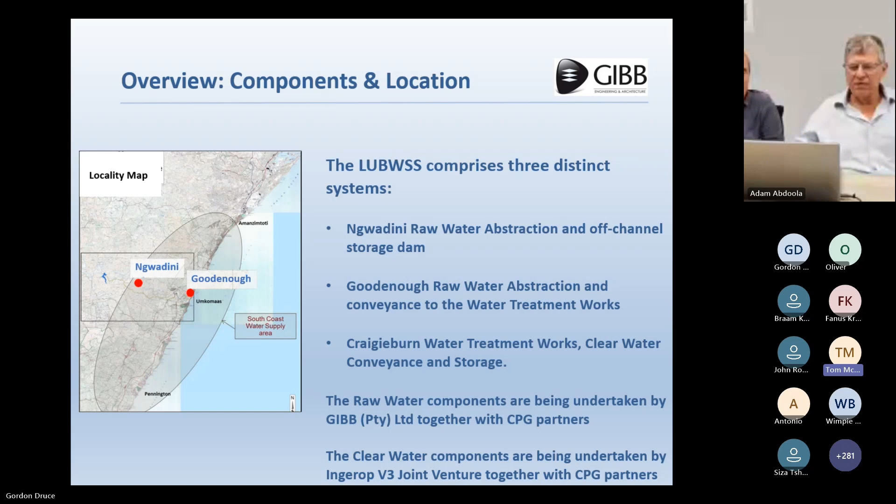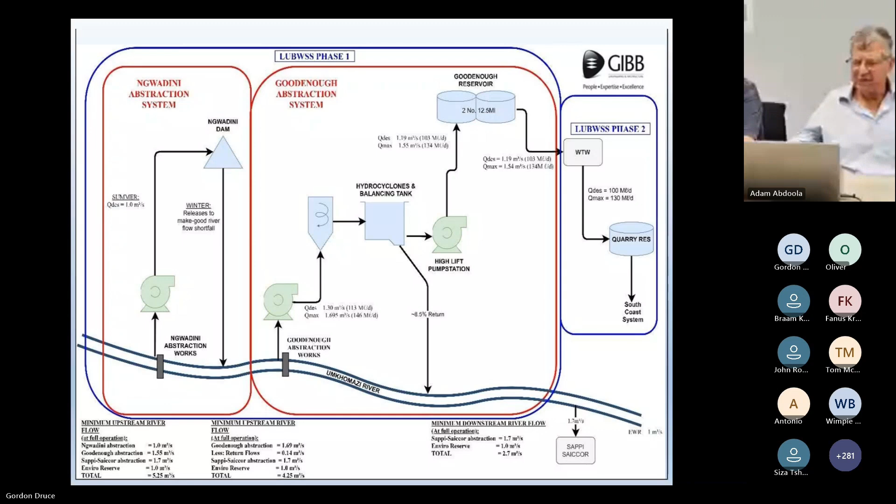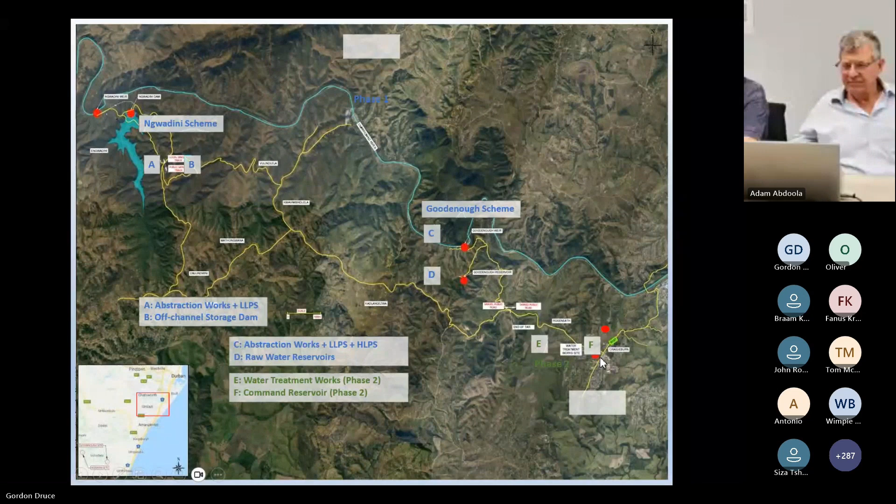So those are the components. So again, for the sake of an overview, we're showing you the number of contracts. There are 5 contracts. There's the two that are finished, the advanced works, the water treatment works. Sorry, not 5. That's 5 from our side, the raw water side that GIBB is responsible for. This shows the whole lot.

So there's advanced works for the water treatment works, which we had nothing to do with, sorting out earthworks platforms. Then there's advanced works for the Ngwadini abstraction and dam. That was really just access roads and bush clearing. And then construction is currently underway. It's the Goodenough abstraction and pumping that we're talking about today. This has been underway for the last year and a half, the civil works 2 years. So underway for 2 years.

The civil works are pretty advanced, and shortly, at the end of the year, beginning of next year, all the mechanical electrical toys start coming in. The Ngwadini Dam started in January this year. So there's a lot of earthworks going on there, and that will be the subject of a future presentation, I'm sure. Because the Ngwadini Dam, what makes it a bit different is there's no clay in the area. So Ngwadini Dam is a rockfill dam with a concrete face to make it watertight.

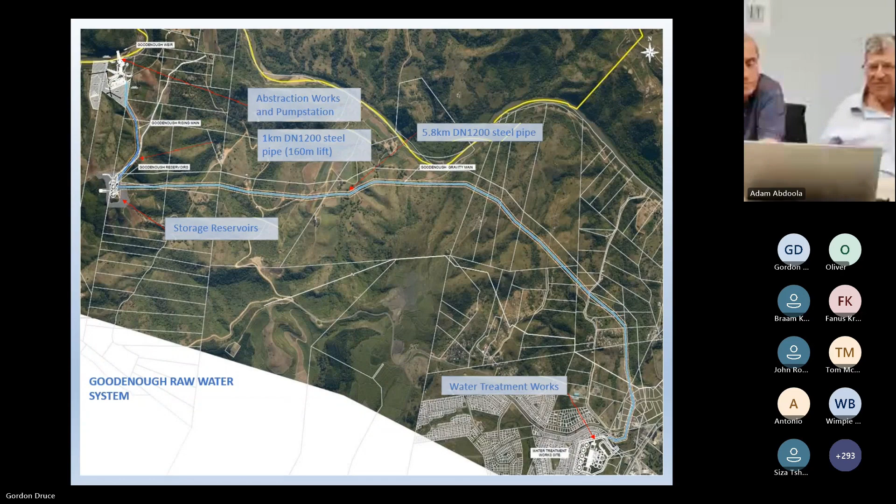So now narrowing down onto this particular contract that we're doing the site visit for today, the abstraction desilting design considerations. Looking at the abstraction out of the river, the Umkhomazi River is nothing like the Uthukela River, but it's still a major river. It's got quite a tight valley, so the valley sides are very steep. So when the flood comes down, the variation of water level is very high. It also has very high sediment loads in flood. Again, not as much as the Uthukela, but it's very significant.

And bearing in mind this is a primary bulk water supply, Umgeni has got to supply water 365 days a year. So if you've got a 4 or 5 day massive flood, you've still got to be able to keep on pumping. If it really gets exceptional floods and you're pumping mud, you need to stop and rely on your stored raw water and stored clear water at the quarry reservoir to keep the water supply going to the south coast. And then if necessary, under very heavy sediment conditions, you can throttle back. The waterworks can run at a lower rate, so at least you have some water, even though you're having to cope with huge volumes of sludge. So that's the sort of thinking needed to have a high level of assurance of supply.

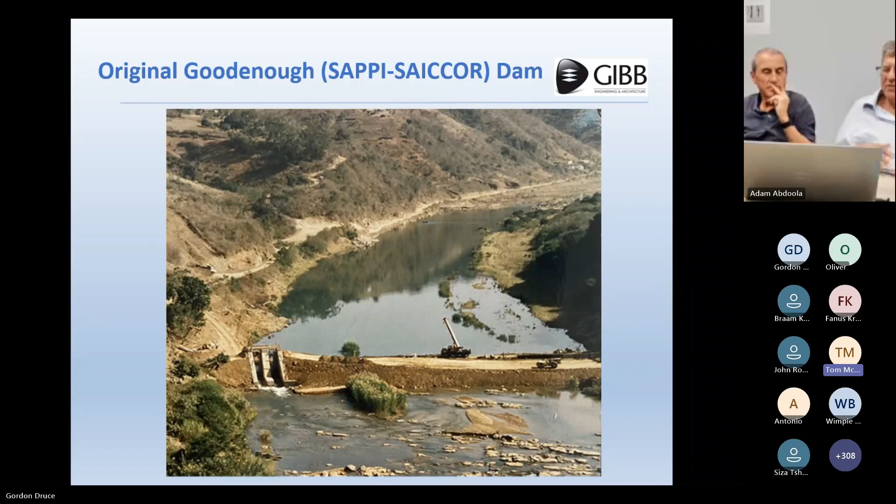So when we looked at the siting, this is a view of how it was when we started the project. You can see the original Sappi nominal weir. It's only 1.5 meters high, and the diversion structure on the left, which would release it. So that's totally useless to Sappi in that state, because it doesn't store anything significant. That was fine for us. But you can see on the north bank, it's very steep and inaccessible. There's no road anywhere near that. So you only have access on the south bank to do all your operations.

Again, unlike the lower Thukela, where you could get access from both sides, which did make life easier when doing your diversion works. So that's another point which made the constructability less easy. This photograph also illustrates the steep slope. You've got at least a 1 in 4, some places steeper, where you're now going to build all your toys, the pump station, outside the floodplain.

Going back to the siting of the weir, it's very important to make sure your abstraction works doesn't clog. What does happen in a major flood, as the flood recedes, it dumps its load. So over a matter of hours, as the flood is receding, you get a massive deposit of sediment in the river. And if you're not at a bend where you've got the higher velocities on the outside, you can have the situation where your abstraction works gets choked up with rapidly depositing sediment, and it's very difficult to flush it out.

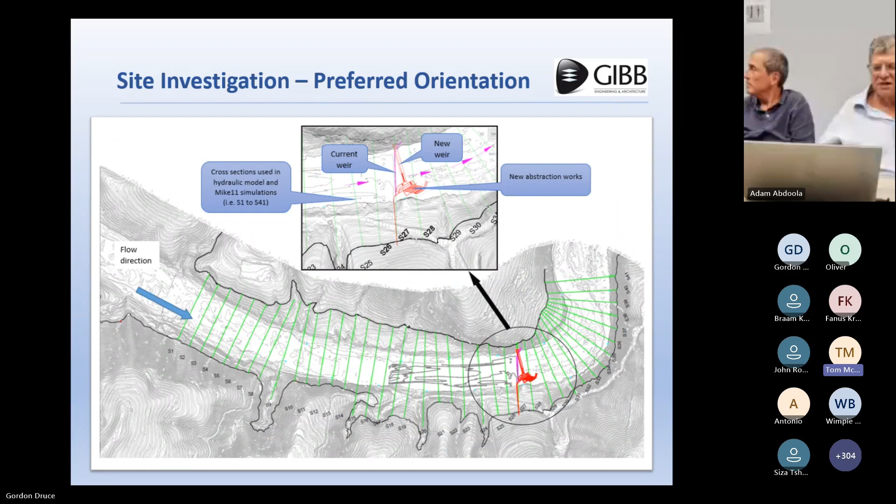Gordon, just use the mouse to show what Duncan's talking to. Gordon can. There we go. I can't actually see your mouse, is it? Yeah. Okay. Yeah, it'll be easy, I think.

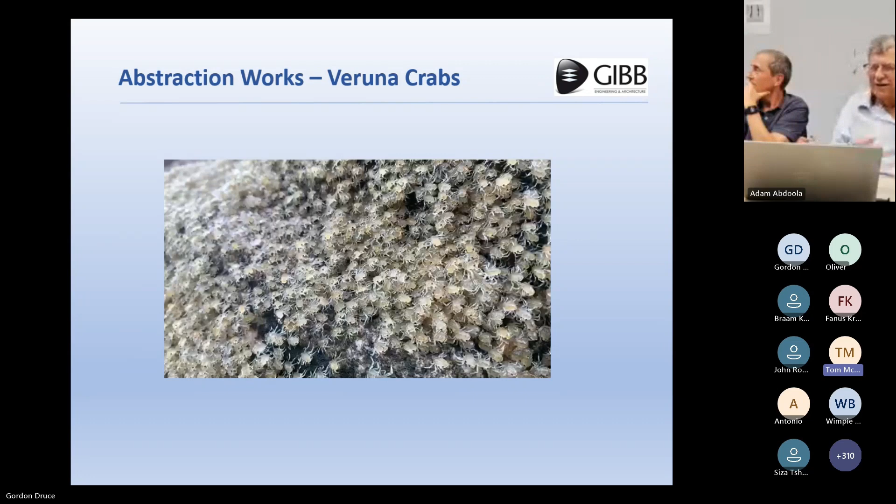These crabs also need to be accommodated. They can't really go up the fish ladder, but on the other side of the weir, we're creating what we call a creepy crawly ramp, where you have a shallow wetted surface, because they would crawl along the water's edge in shallow water on the rocks. So if they can't get up the fish ladder, they carry on and they end up the other side of the weir, and they'd have a shallow water's edge that they can climb up. Well, that's the idea anyway. Hopefully it'll work, but we'll see.

So yeah, the creepy crawly would be on this side, on the near side of the weir. That's not a good representation of it. Effectively, it's just a natural rock surface, so it won't actually look quite like that. We have actually modified it since this model was done. This model, by the way, is done in Revit software, which is excellent for the structural guys, but it does need people who are good at Revit.

The idea of Revit being a 3D model is you've got the accurate representation of the whole structure, and you can generate a long section anywhere in it. Whereas the old timers like myself and Gordon are used to doing everything in 2D drawings, where you need lots and lots of cross sections. So you can now generate a cross section wherever the contractor wants it. If he wants an extra cross section, it's theoretically a click of a button and we can generate it for him.

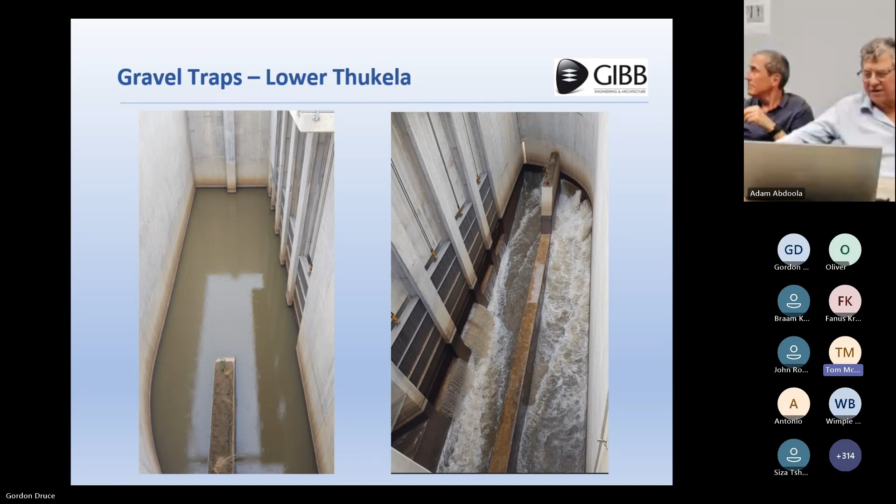Now going on to the hydraulic modeling. So this was done at Stellenbosch University back in 2017, 1/40 scale. The whole river gets surveyed and modeled on a 1/40 scale, and the abstraction structure gets built out of wood, plywood, painted, with the weir, and then they try it out with the different return periods and putting sediment down. They use a mixture of sand, and for the bigger particles they use peach pips, which doesn't strike me as quite intuitively correct, but they say it behaves hydraulically very well to model the bigger boulders and the like.

So the model helps prove the flushing. They put a whole lot of sediment in there and open the radial gates, just a slot which represents a radial gate, and they see that it actually flushes out quickly and effectively, and if not, they change the orientation and try it again. The purpose of the modeling is that it's a very complex process to do it numerically. So this gives you an exact scale of what will really happen. If it works on this model, you've got a 99% chance that it'll work in practice, and you've got the orientation just right to make sure you've optimized the situation.

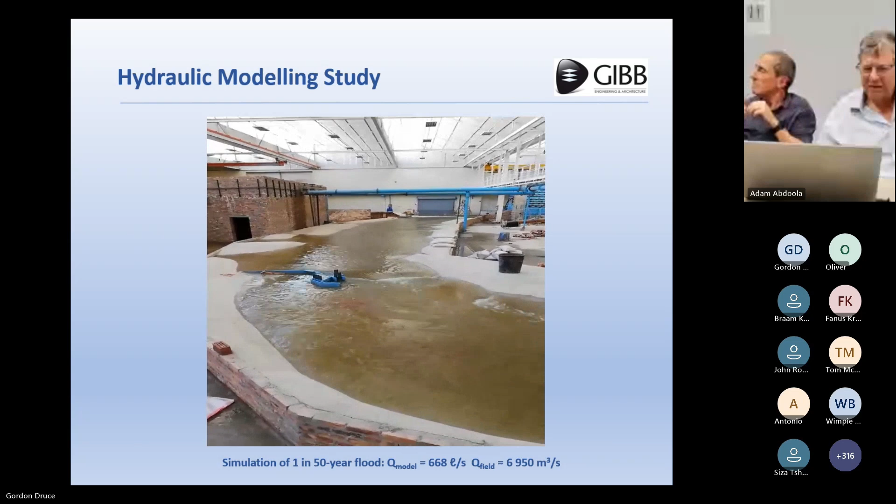So we also used the model. While we had the model, we realized this problem with the cofferdam. In order to give the tenderers a good basis to know what to do with their cofferdam, we modeled various things like how much of the river we can block off with a concrete weir, and how much of a gap to leave and what effect that would have.

So after playing around with these models, we could then say to the tenderers that if you build a 10-meter high cofferdam and you leave a gap of so much, like we specify the distance from the outside face of the cofferdam to the structure itself, you must build it within 50 meters, leaving a certain minimum gap. Then that constitutes a 1 in 5 year flood.

And then in terms of risk events, if it overtops the cofferdam, the insurance will then pay for that, and that'll be a claim event. So it takes the guesswork out of tenderers, so they know exactly what they're pricing for, what sort of structure, what height, and what the dimensions are that they must leave free. And so that was like a fixed design specification. So we know how to deal with the floods, and insurers were also on board with that.

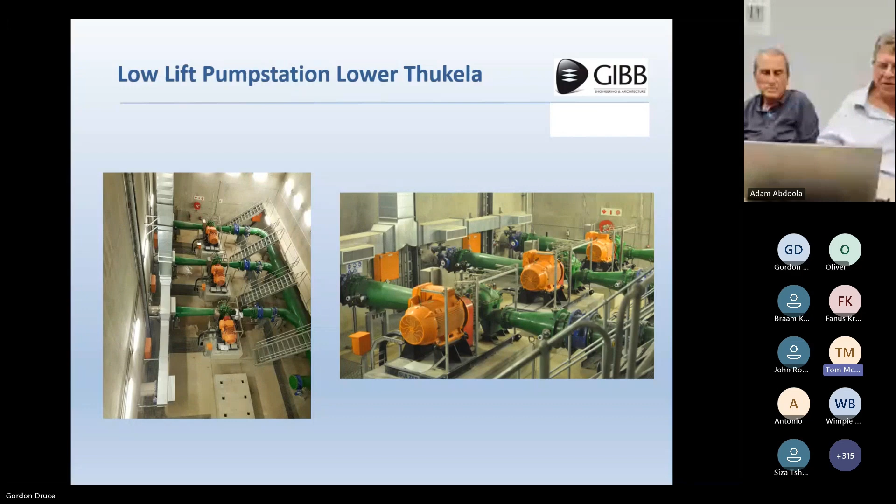There's nothing in it. It's all solid, and that gives you a working platform to get access for what was initially intended to construct from that, but also to maintain and bring the pumps in and out of the low lift pump station, and gives you access to the abstraction works up to 1 in 100 year flood. So that's the lower part.

The road that bisects the site is actually a public road, a district road. It's a dead-end road. There are only 2 residents living beyond. So on the right-hand side is where you approach from Craigieburn side. When you're coming to site, you'd come down from the right. The road going to the left is only 2 residents who are a bit bemused by all this, because it was such a peaceful valley until the contractor started making a noise and rearranging the landscape.

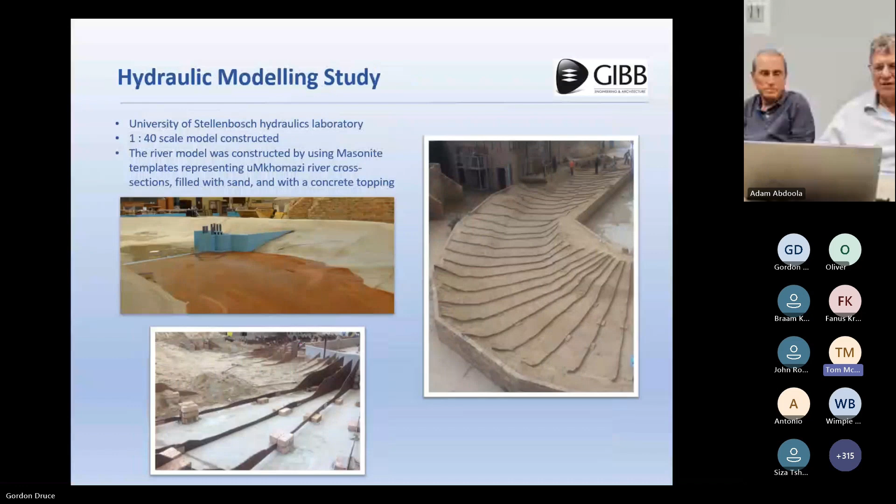And is that built already when we look at the progress? No, not yet. The contractor's been concentrating on the abstraction works itself first, and then he's still got to get to the other side. That will happen in 2 years' time.

So getting back to it, we ended up pumping up through the hydrocyclones. That would need to go into balancing tanks. So you'll see 2 compartments there. The idea being that, with the hydrocyclone, we'll show you just now how that works, the part that gets pumped away goes into the balancing tank, but because it's still containing sub 25 micron particles, there will be some sediment.

So in order to flush it without taking the system offline, we have 2 tanks. So you take the 1 tank out of commission, drain it, and then use the other tank, pass through flushing water, and you flush out the sediment when you need to on the one side of the balancing tank, while maintaining the flow to the high lift pump station and on to Craigieburn. That's why it's got 2 compartments, and it's designed for flushing.

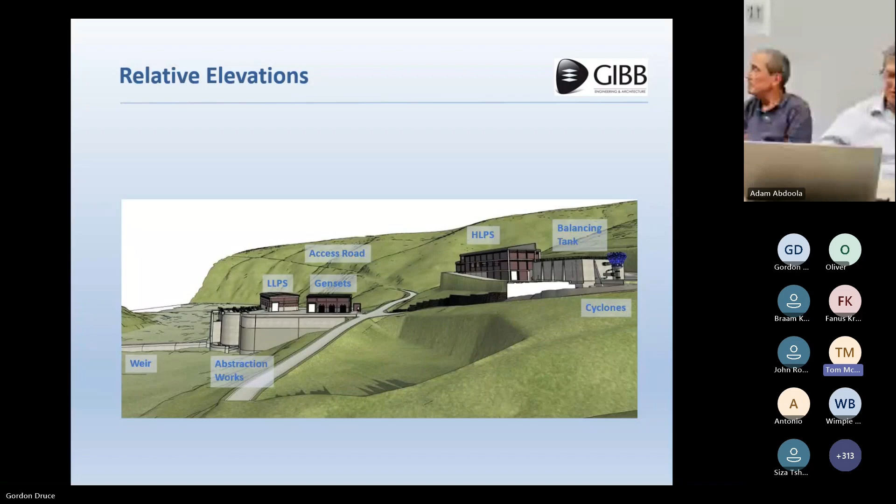Just another modeled view of the elevation. You'll see from the photographs it actually looks more dramatic than that. This looks relatively tame, but the photographs will do it justice, I think, and how steep it is. We've got this massive retaining wall on the front, which we'll talk about with the photographs.

Getting back to the hydrocyclone, as I say, we want to take out as much as we can physically from the abstraction system. In reviewing, although the feasibility and preliminary design was done by AECOM, we did have another relook just to make sure that we haven't missed something. So we did consider what the options are, because this is an important step, and because it's got to be pumped some distance, it's important to do the best you can. The hydrocyclone is very compact, as you would have seen from the previous picture.

The one alternative we thought of, given the steep site, would be you get GRP pipes, like 1.8 meter diameter, and you have a lot of them, 20 of them all in a line. You've got the steep hill, 1 in 4 slope. One possibility was to have like a pipe organ where the water's flowing up, creating very laminar conditions, flowing up these pipes, and you then flush them one by one, alternating while pumping continuously. And at the top, you then have another transfer pump station to send it up to the reservoir.

The one advantage of that would be you do away with the hydrocyclones. That had some issues at the Lower Thukela one. So we were just wondering what other alternatives there were, but it was decided this is too new to try on a major bulk water scheme. So the client wasn't keen to do something new. They said if it was a small waterworks, they would have gone for it, but being a major bulk primary supply, they were keen on sticking with tried and tested.

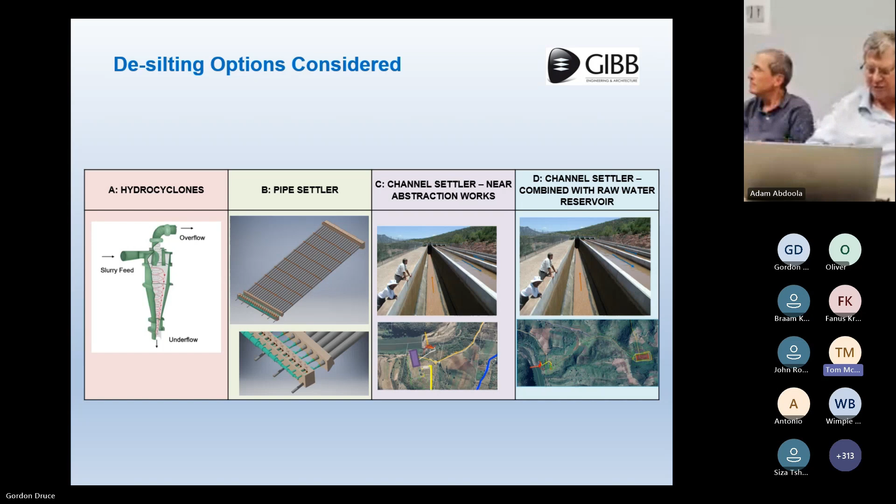The usual one that's done is long settling channels, but these are very expensive and take up a lot of room. They'll be about 150 meters long and designed to create laminar conditions flowing down a channel, and then you take out one channel at a time and flush out the sediment back to the river. So that's just by way of illustrating why we said it. Really, there's no other choice but hydrocyclones to take out as much as you can.

And although you're only taking out a small percentage, maybe at most 5% of the sediment, it's still worth it, because that's 5% less which gets taken out of your balancing tank and your raw water tank, because you're talking about hundreds of tons a day of sediment altogether, which goes to the waterworks. But if you can save 10 tons of that a day, not settling out in your balancing tank and your reservoir, you save a lot of maintenance work.

So the idea is to use the hydrocyclones to take out as much as possible. Now, the nature of hydrocyclones is they're designed for the mining industry to separate crushed ore slurry from the water. So you want to separate out your crushed rock with your gold or whatever in it you're trying to extract. And that's normally done as quite a thick slurry. Here we're only talking about up to 1% suspended solids. So it's much less solids than would normally be used in a mining application,

but the physical process is the same. The water comes in tangentially at the top, and so it comes in at a very high velocity and spins. You have what's called a vortex finder in the top middle, and at the bottom you've got your underflow spigot. So the size of the vortex finder, the size of the spigot, the geometry of the hydrocyclone determines how efficient it is in spinning. The heavier stuff gets thrown to the side and ends up at the bottom.

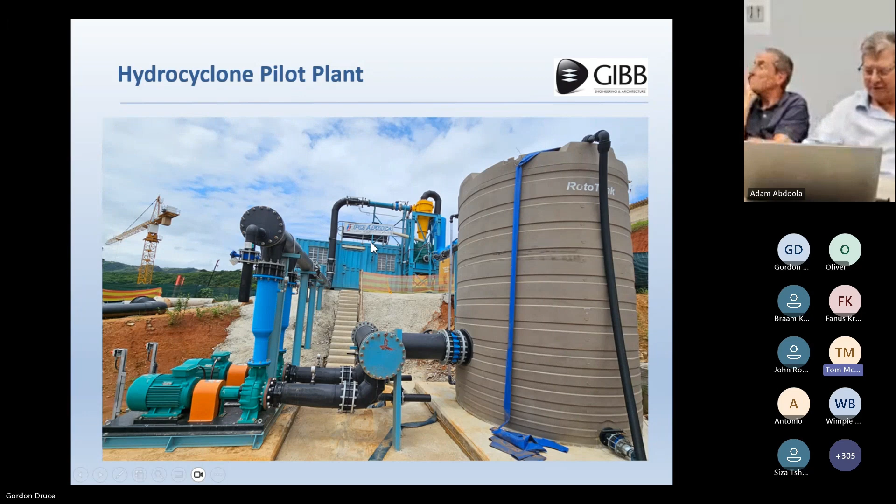So the contractor's still battling with the dynamics of putting through the sediment and getting meaningful readings that actually make sense. There are a couple of learning curves to go through, and we're still going through that, with how to make sure we get a representative sample coming through, because it doesn't settle out in the main tank. This is just a further detail. So the blue, the hydrocyclones, the lower pipe would be when you bypass it. So when we deem the water not worth putting through the hydrocyclones, you'd open a valve and send it straight into the balancing tank.

This is a model of the high lift pump station. It's got 5 main pumps, just over 1 megawatt each, 6.6 thousand volt motors to make them more compact. So on the left is the pump hall. These major orange boxes would be the variable speed drives. These are very pricey animals, about 5 million rand a pop, and very large and very heavy. So the electrical hall is quite a major part.

The reason why we need variable speed drives is because the power coming from Craigieburn, Eskom's power, is on a spur line, so you don't have the benefit of a ring feed, where if one side goes down, you can go on another. So it's a dedicated 22 kV power line, about 7 kilometers away, and they aren't able to handle the massive starting loads that you'd get with conventional soft starters or other means. So Eskom insisted that we go variable speed drive to keep the startup loads very low, and it also means you can fine tune your flows through your hydrocyclones to get the exact flows that you want.

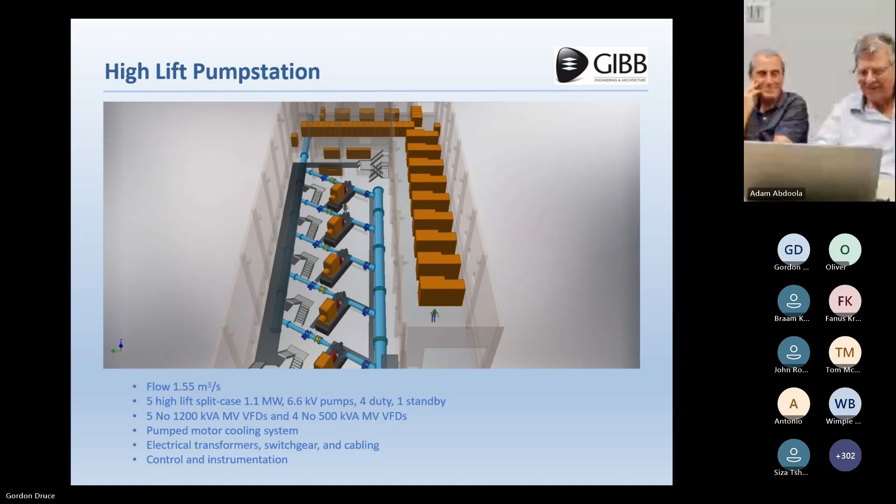So low lift's got 4 pumps, the high lift's got 5 pumps, so they're obviously slightly smaller individual capacity. Standby generators, we covered that. Pipelines, general works: there's a 1 meter diameter pipe from the low lift going to the hydrocyclones, to keep the velocities up, to go through the hydrocyclones and not have too much settle out in the pipes. And we've got 1,200 pipes going up to the reservoir and 1,200 pipes going to the waterworks.

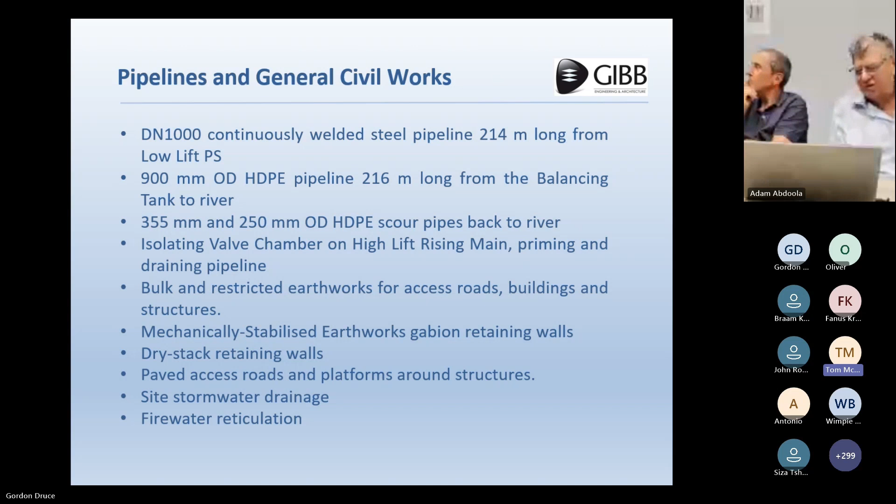There's another question from Umkhomazi. Was it the designer's choice to choose VFDs instead of capacitor banks? I don't even know what that means, but hopefully you do. Capacitor banks are more for correcting power factor, so that you don't have too much inductive load, which pushes up your electricity bill without the benefit of extra power. So capacitors would be used to bring the lagging or leading power factor back to 1. But variable speed drives do that as well. So that's a side benefit of the variable speed drives.

Capacitors also are like Chinese electric cars; they're liable to explode. They can be dramatic and then need to be replaced quite often.

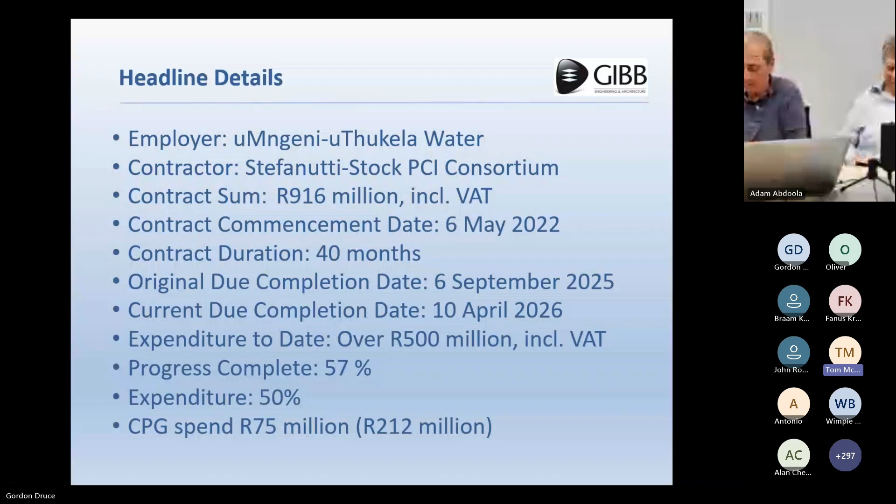The contractor is obliged to use contract participation goal partners, and their target is 35%, so it's like 212 million, and to date we are up to 75 million. Headline quantities: bulk earthworks which are payable is about 40,000 cubes for the abstraction works site. There was an advanced works contract which didn't go ahead, so it was added to this contract as a VO, and that was for the bulk earthworks for the raw water reservoir site, and there the contractor removed 54,000 cubes. We didn't have to take it too far away because we put it in the valley next door to create a platform for the contractor for that project.

Mechanically stabilized gabion walls, we put about 1,300 cubic meters in. Concrete, both for the permanent works and for the contractor's temporary works. Structural and mass concrete are about 10,000 each. So we've got about 21,000 there, and at 5 cubes a truck, it's 4,200 loads. So I guess the truck drivers are getting used to the road and they can drive up and down there in their sleep. So far, 1,400 tons of reinforcing have gone in. Okay, those other figures I've mentioned already.

You've seen that picture because Duncan has shown it already. He stole it out of my presentation.

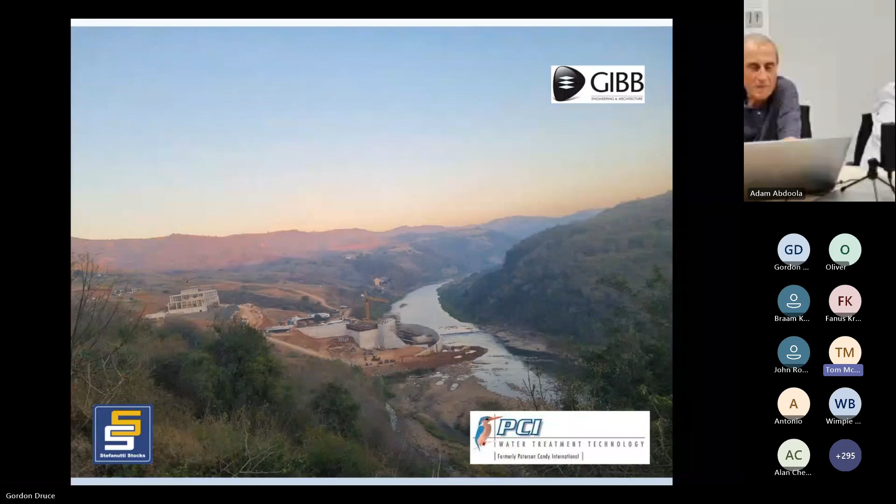Esmond took that picture about 2 months ago, so if you get the lighting correct, you can get quite a good view of the early morning valley in wintertime. And that one as well. It's a view from the high lift pump station platform down onto the abstraction works. Colourful sky in the background. The river can get quite angry with you too. That was early 2023.

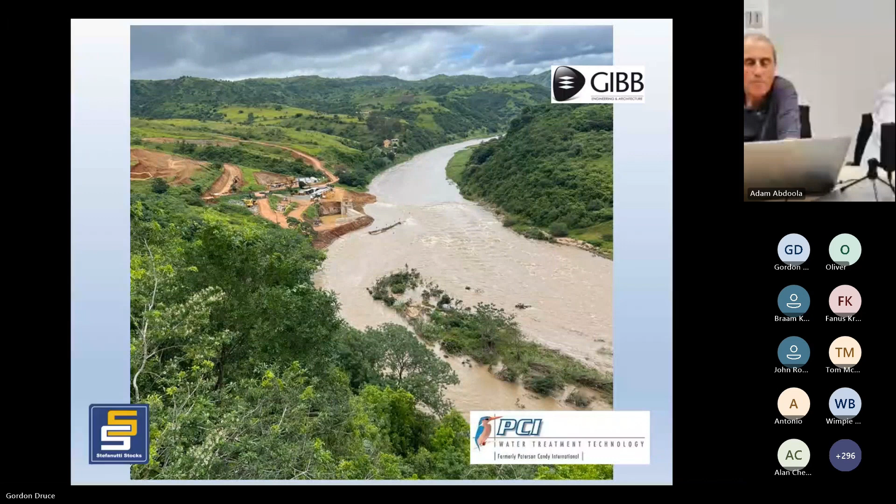Okay, let's see how these drone images work now. So that is right at the beginning of the contract. You can see the diversion structure over there. The water is very clean. This is the middle of winter. This is the low weir wall, which is the upstream toe of the earth embankment that SAPPI had. To start proceedings going, the contractor needed to get across to demolish the weir from this side going backwards. But there is a diversion through that structure there. So we put in temporary culverts on that side and then created a platform over that to get to this point, and then we diverted the flow.

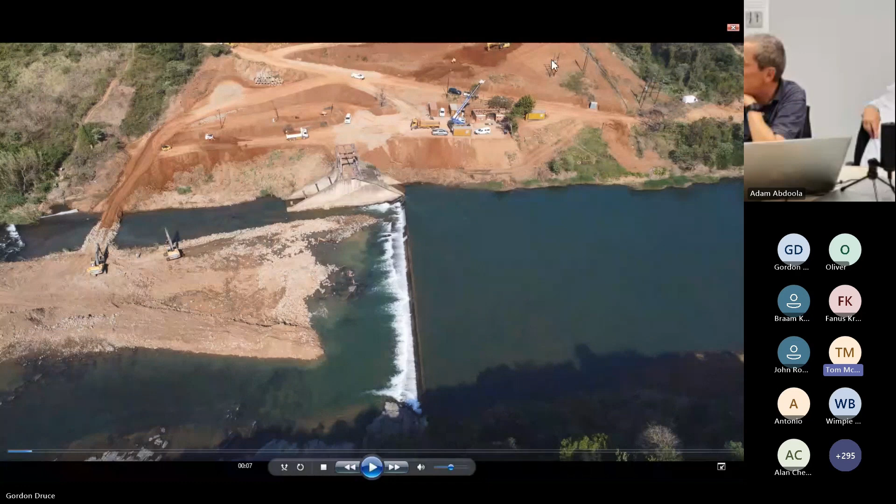All right, then the next one is having broken back to there, access moving around all the time. Sorry, I mentioned that we've paid for about 40,000 cubes of material to be moved. You've probably moved double that in doing your temporary works. Because access is a problem, creating accesses and what have you has taken quite a lot of effort. And it's actually been fascinating to see how it's been done.

Right. Then the whole weir has been demolished, and the cofferdam wall around the outside was being created. The earth embankment cofferdam wall, so that the permanent cofferdam wall could be constructed. At this stage, the contractor was concentrating on doing the abstraction works, which sits here, and that's the position of the low-lift pump station there.

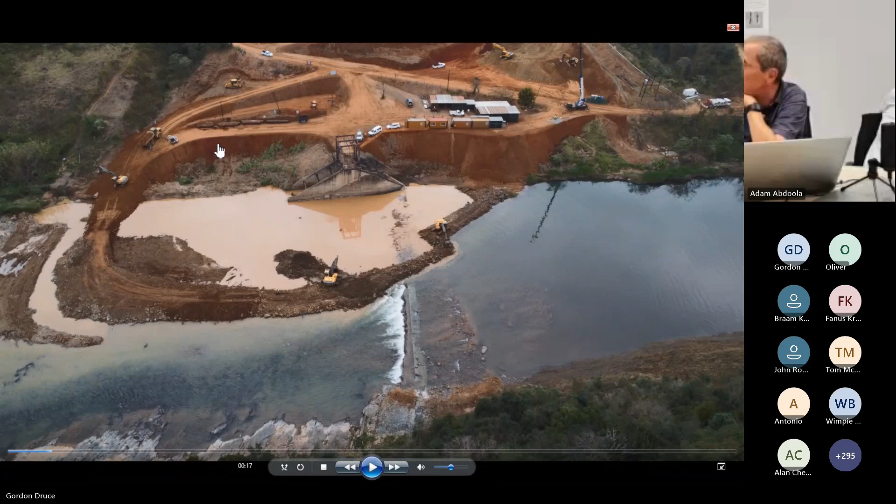There you can see they're setting out the foundation of the cofferdam wall. They've already started excavating into the rock here for the abstraction works, and the excavation for that is quite complicated in that we've got different levels for some of the elements. Having said that, we were quite fortunate in that the competent rock levels were higher than we anticipated. Because what we thought we might need to do is actually go down to competent rock and then do engineered backfill underneath it, but we didn't have to do that.

So that's a saving to the project. It's kind of cost us a bit of time. Yeah. And also we couldn't do, I'll come to it later, we couldn't do bulk excavation. We had to do restricted excavation because of what happened. I'll get to that shortly. But it's pretty hard rock, and we had peckers in there going for months, to be quite honest.

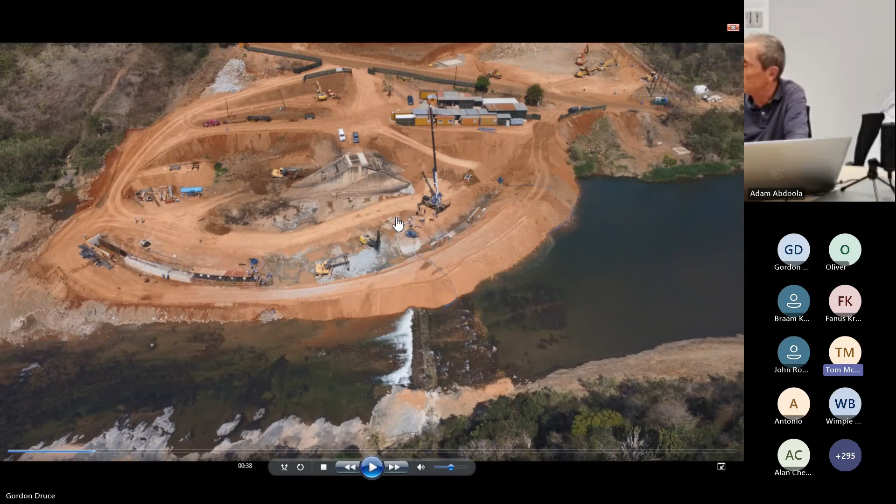Okay, at this stage, that's just more an alternative photograph, just more same. They started at this point. They've started doing the basis for the cofferdam on this side, the eastern side, and the western side. They left the middle section out because they needed to first cast the first section of the weir block and the first section of the apron slab, because the cofferdam wall had to go over that, so that in the future, when we take the cofferdam wall out, they can work in the dry to get to the far side of the river.

That diversion structure in the back there, only part of it falls into the new works. So we needed to trim off the downstream section of those two walls there, and the rest of it was going to be built into the mass gravity platform. But the position of that was highly appropriate for the contractor's tower crane to go. So what remained of that, we filled with mass concrete, which created a perfect foundation for the tower crane. Just a little bit further with that same section of work.

And from a timing perspective, in terms of your start of the project, where are we in the time frame of the project now, Gordon? Okay, we started working on the 1st of June. This was after August. And the reason I'm saying that is you can see that there's vegetation that's growing in there. And at this stage, we'd probably just come back to work on the site because of socio-political issues, and there were quite a number of issues at the start of the contract.

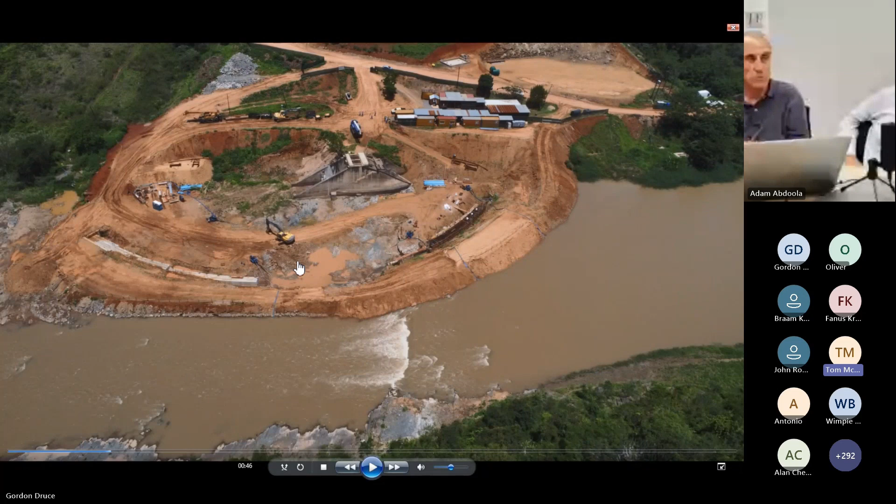I think at that stage we've now cut off the walls of the diversion channel there, and they've started with the excavation works on the pump station in the background there. And there, that's the earth embankment, and you can see they've started breaking up rock there, and they've started casting the wall of the low lift cofferdam over there.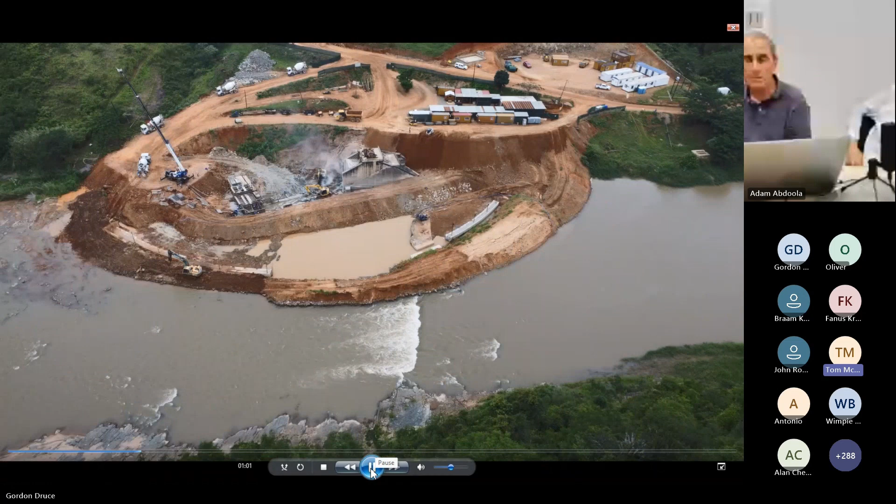Now that wall was also for a 1 in 5 year flood, but because you've got a much wider river section, it could be lower than what this wall needed to be, and that needed to be done by the 16th of December 2022. And I think we finished it on the 17th of December. And we were fortunate that we did, because that's when the heavy rains started coming.

So that view you see now is that first embankment for the cofferdam, the outside, has been washed away. Flooded, not washed away. Flooded. The contractor recovered some of it because he needs that material for his access. But eventually they lost it. And then you've got to go and find your footings and things that you started working with under slush and stuff. Because there was some concrete cast, the footings for that cofferdam. No, they're there. Oh, they're there. It's that wall there. Okay.

So that's debris from the floods that's brought onto the reinforcing. And I think they were Y20s or Y25s, and every one of them got bent over. So the force of the water is quite high. Yeah, so I think at that stage the water level got to almost the top of the low lift cofferdam, and it did get a little bit flooded, but they dewatered that regularly all the time.

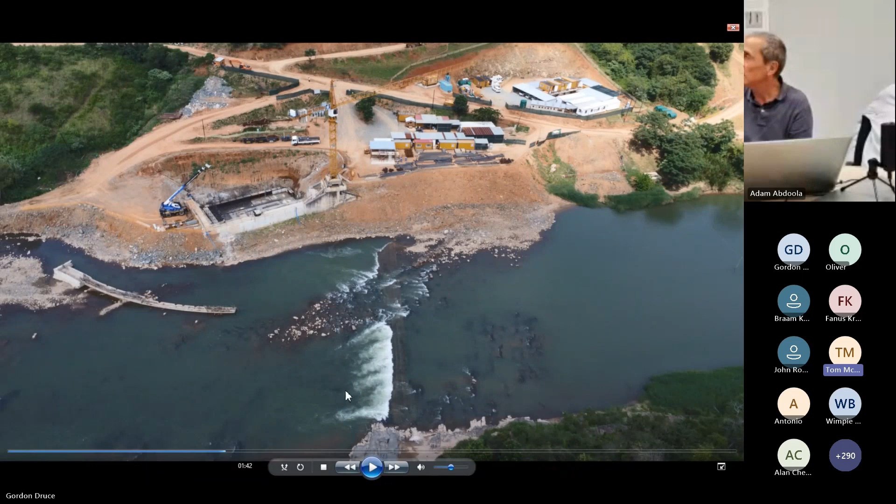Anyway, so when that floor was cast, obviously you needed to cure it, and the easiest way to do it was just flood it with water. We did that for several days and got in and carried on with what we needed to do. So this is several months later, because you can see the water now is quite clear and it's starting to drop.

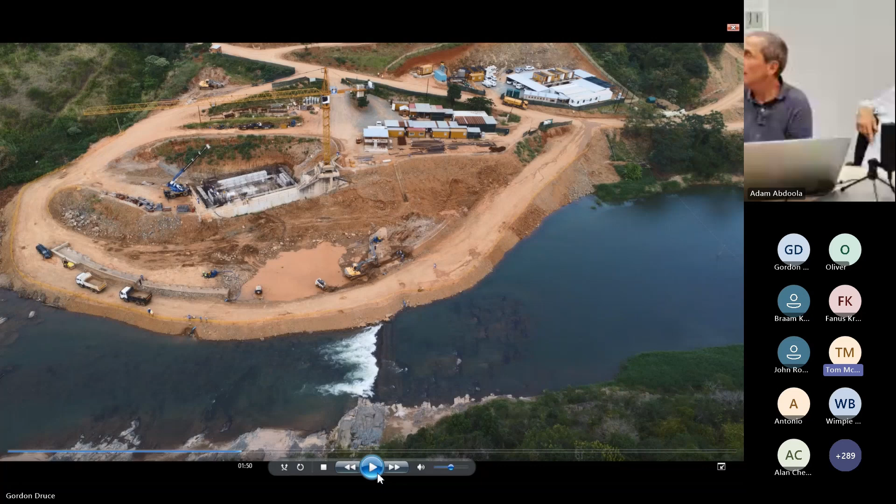But anyway, there. Okay, at this stage, the contractors now re-established this earth embankment and can get going with the weir and the entrance slab in that section there. The walls are starting to come up. That's the first weir block that's going to be cast. That's the shuttering that's going up. There, they're pumping the first section of the

weir. Now that's 6 meters wide. Originally, we thought it was going to be 6 meters deep, but because we could bring the foundation levels up, it's 4.5 meters deep. And Wits University, Professor Ballim, did heat of hydration projection models for us. And ideally, it was to cast 1.5 meter lifts 4 days apart.

They checked that we could go up to 2 meters, but going from 4 days to 7 days didn't make any difference either. So it suited us with 4.5 meters to go 1.5 meter lifts. And what MPa concrete is it? 25 MPa. 25 MPa. Yeah. The entire, all the structures or just the weir?

No, the weir. Most of the structural concrete is 35. 35. Yeah. But the waterproof or the water retaining concrete is all 35 MPa. All has a very high pulverized fuel ash content. Yeah.

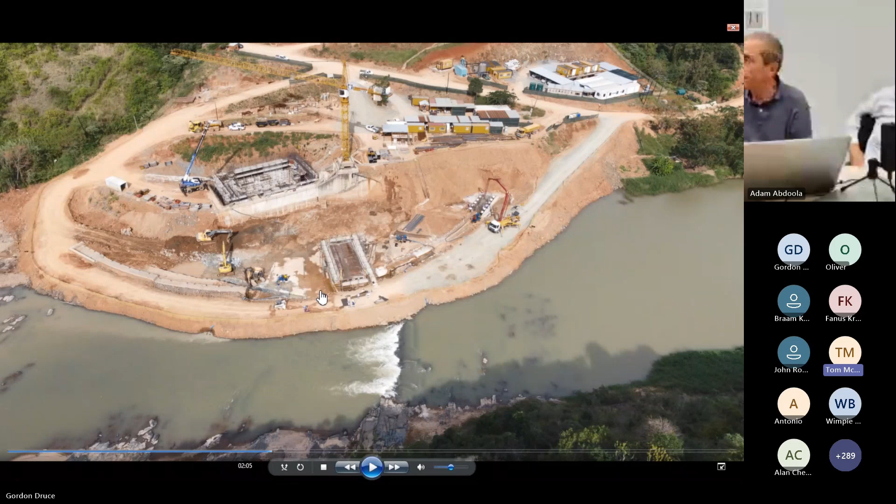And that's the last section cast with Hessian over it. And then you can see getting going with the cofferdam walls here, the walls in the background. Now once that got to a certain level, we could then start demolishing the low lift dam around it, because this was also in the dry season, so we're happy to use this as a protection.

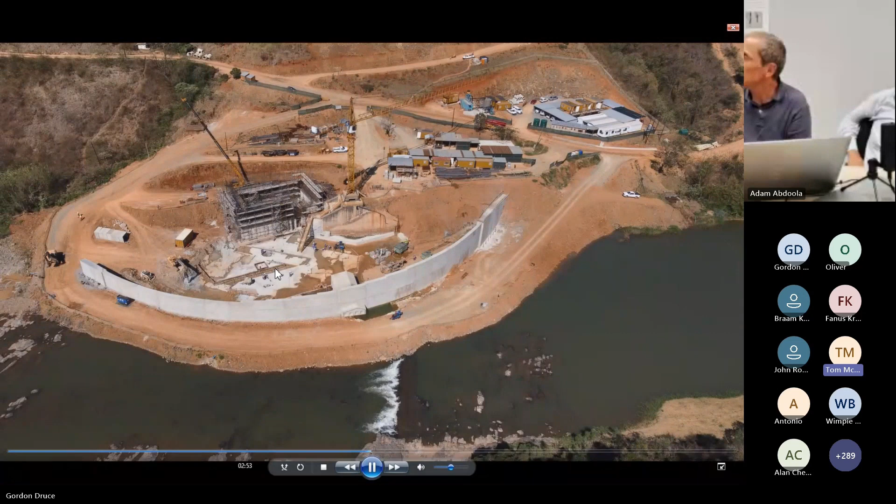Casting the section of the floor to the abstraction works. Is that far right, which would be west, eh? The west, the coffer there, is that into rock in the bank, or how is that keyed in? It's anchor grouted into the bottom of the rock. Okay. Yeah, because from this rock level, it climbs quite quickly out of the valley here. You can see the fishway starting to take shape there.

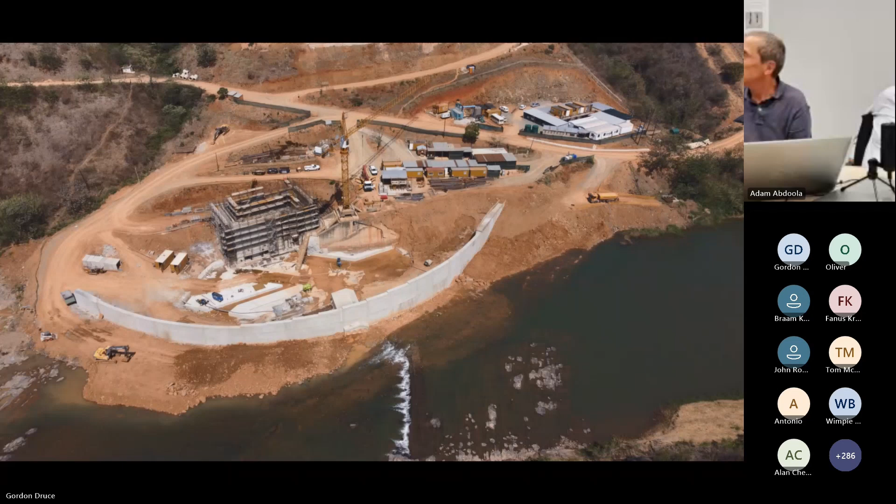As these photographs go, you'll actually see the different elements that Duncan has spoken about taking shape. And then that structure there is 20 meters high to the 1 in 100 year flood. I think we'll just run through these. I don't know if there's anything more that we need to talk about, otherwise just show people. And these photographs are all about a week apart. I've just selected random ones.

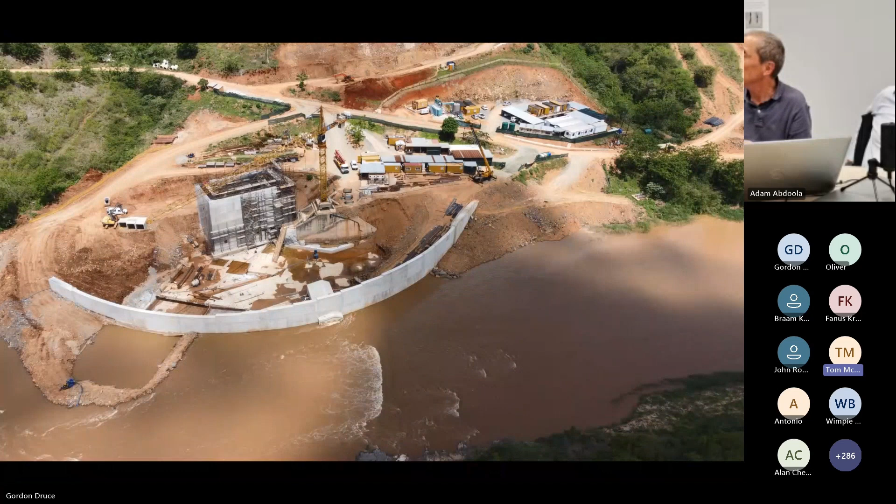Now you're heading into a rainy season again, are you? Yeah. It's December last year. The contractor has put in a culvert over here, and they've only just recently put in one at the top end over here. Now that is to create access. We've got to divert the flow through the structure once the hydromechanical equipment is in there, so we can go and demolish this cofferdam wall and then carry on building across here.

So we have to get access into here to build the earth embankments on the other side of where the weir is going to be built. So that's what this is for. And what happens to those when the project's finished? Unfortunately, it's a high quality concrete wall that's just going to go. No, the cofferdam, I'm talking the culverts. Also, so in theory it's expensive temporary works. Yeah. That's in the way of the flushing system.

Yeah. Because the hydraulic study said that there were rocks in the river down here which had to be taken out as well to take it down to the lowest level of the fishway. That's the start of the flushing channel there, the downstream end of the flushing channel. Those are the sand traps going in there. Those will be the gravel traps and the boulder trap going in there.

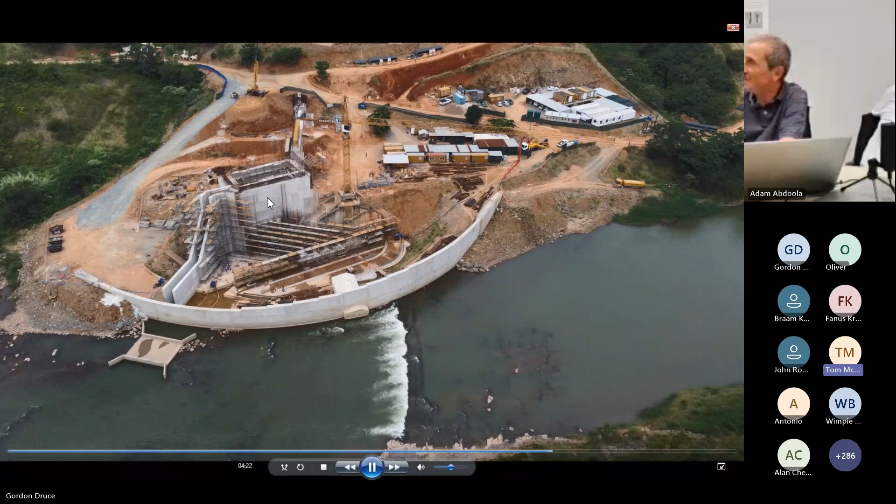The contractor stopped the high lift pump station walls at a certain point below the final level. And the reason is that there's a cantilever gallery on the end here, which needed to be supported off the top of those. Don't support a cantilever, it supports itself. Anyway, it's on the top of the sand trap channels on that side. So the sequencing changes caused by those delays have had quite an impact on what is happening.

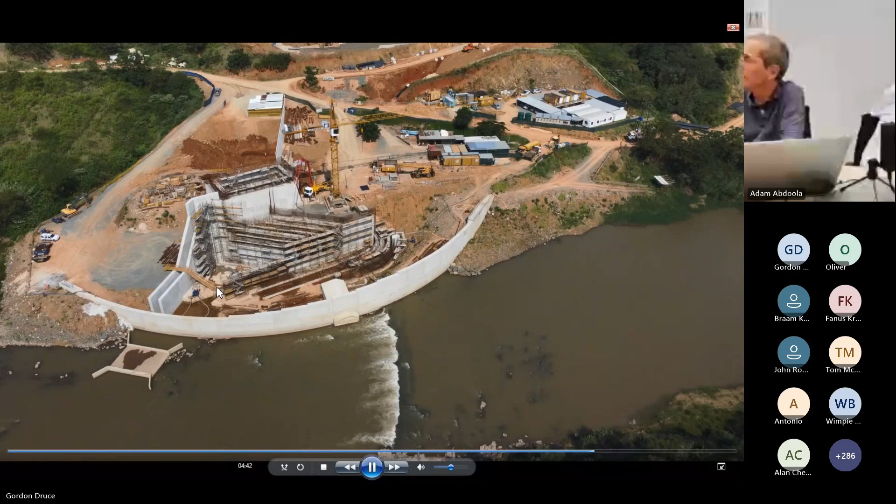It's quite an imposing structure when you stand in there. You see, that's probably, I'm trying to see. These are all taken at lunchtime every day, so you don't really see people. But man feels quite insignificant in the bottom here.

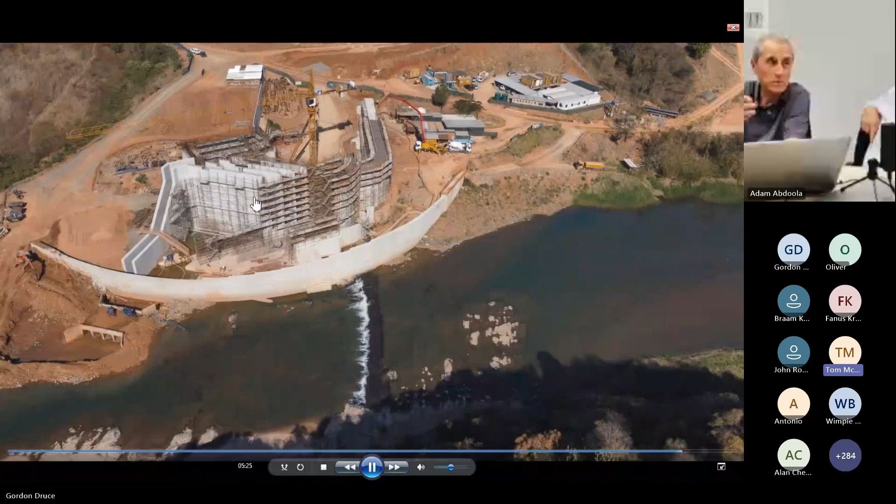Because of the height and access here, on the inside of those sand traps, you've also got cross walls. We've got sluice gates and screens. So you've got this massive structure, 20 meters high, and it's got to work inside there. It's quite difficult. And getting back there to do remedial works is going to be awkward. So the contractor's been very diligent; once they've cast it, they do the remedial works immediately. And then once you strip the shutter or the scaffolding away, you've got good looking concrete.

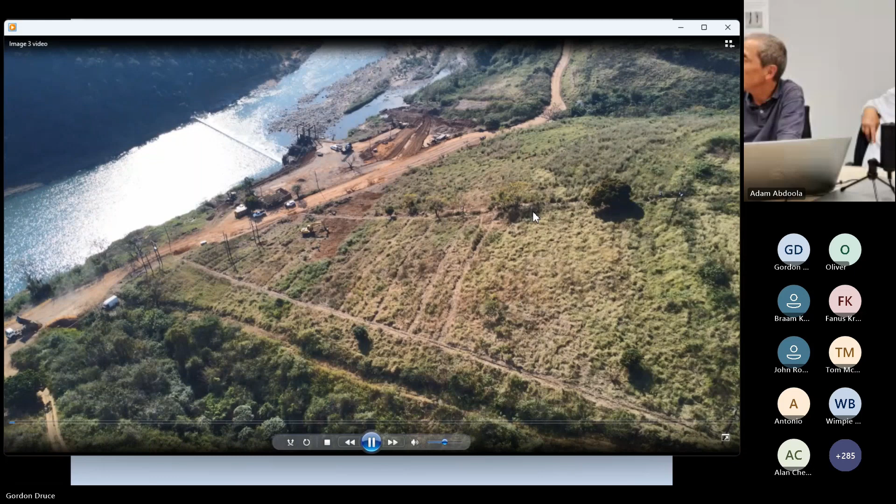Okay. So now that's very similar from a different aspect. And I've got these ones of the high lift pump station and the balancing tank. So you can see access has always been a problem. Very steep land. All of those structures are founded onto competent rock, either directly onto rock or onto mass concrete foundations which go down onto rock.

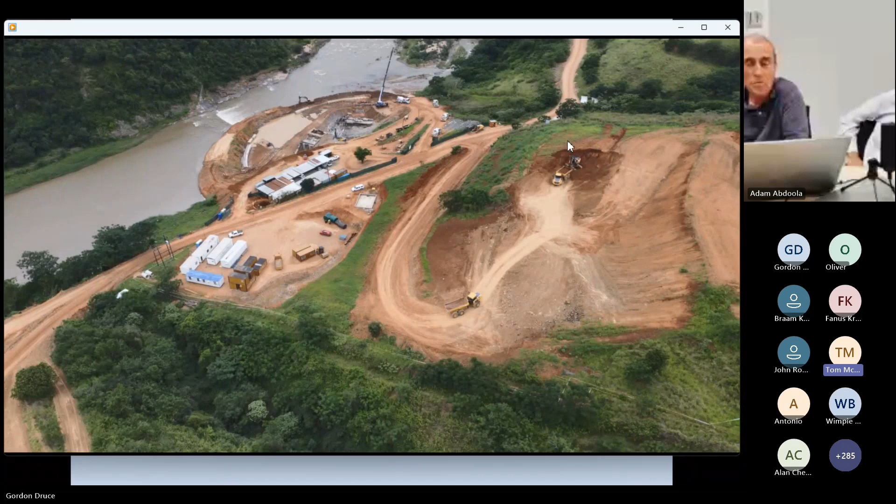The problem that we had is that at that end of the platform, the rock formation fell away quite steeply. The transition from incompetent rock to good rock was a bit deeper than what we expected. So in that corner, we tend to have quite deep mass concrete footings under our strip footings. The infill under the surface bed in the pump station is all cement stabilized sand. The pump plinths all go down onto competent rock, and then they're supported by the cement stabilized sand as well. So they're way bigger than the mass that you need for dynamic loading.

But like I said, this platform up at this end over here was going to be a site camp. Like I said, wonderful views, but it's kind of trekking to get there.

Kind of in the background, you can see what was going on at the same time. That there's an isolation chamber. It's an isolation valve for the rising main. You can scour the rising main from there. The air valves are in there. So in itself, it's about 7 meters long, by about 4 meters wide, and about 5 meters deep.

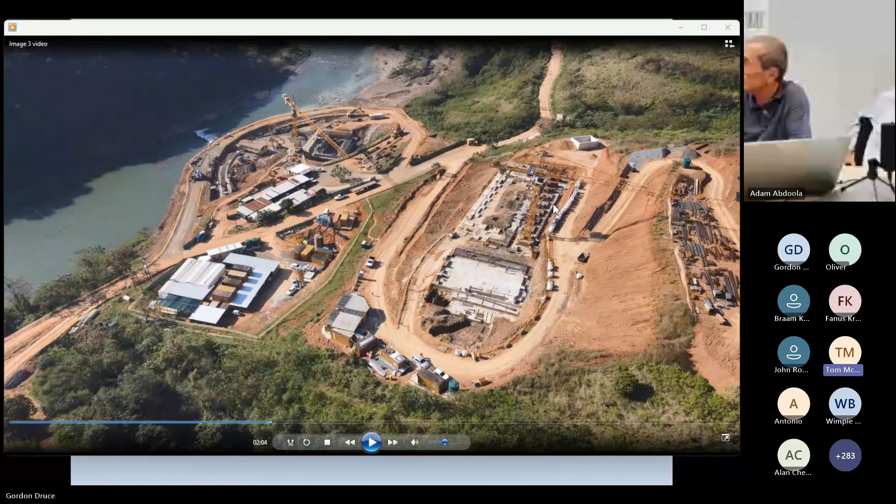What's happening in with the other tower crane? What is that structure going in there? Sorry, at this end here is the balancing tank. So that's the floor of the balancing tank with the outside walls. They haven't started the buttress walls in the middle. And then that's the high lift pump station in the background. So at this point, we are really only doing the foundations of the high lift pump station and the floor of the balancing tank. And that's at a level outside the 1 in 100 year. Yes. This is probably 30 meters above.

Okay. That there, it'll have to be a biblical proportions flood to reach that, in which case people won't be around. Some of us lived through Demoina. That was almost biblical proportions.

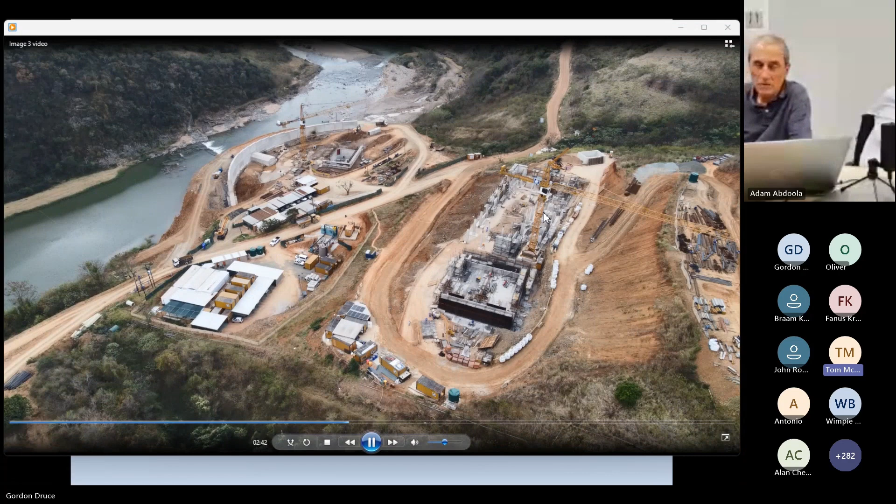So the contractor was able to use this as a laydown area. You know, the site offices for this section originally were here, but because of access problems to put the raw water rising main and the HDPE scour for this end, eventually we had to move these up to the platform top. You can see the frame structure starting to go up. It's not a complicated structure, but we've got a series of different levels and it's not continuous floors across, so it was interesting.

And the contractor wants to be out of this upper section by November this year. When I say out of there, the civil works contractor is to hand over to the mechanical department to go and put in or start installing the pumps and the gantry cranes and the electrical equipment and whatever.

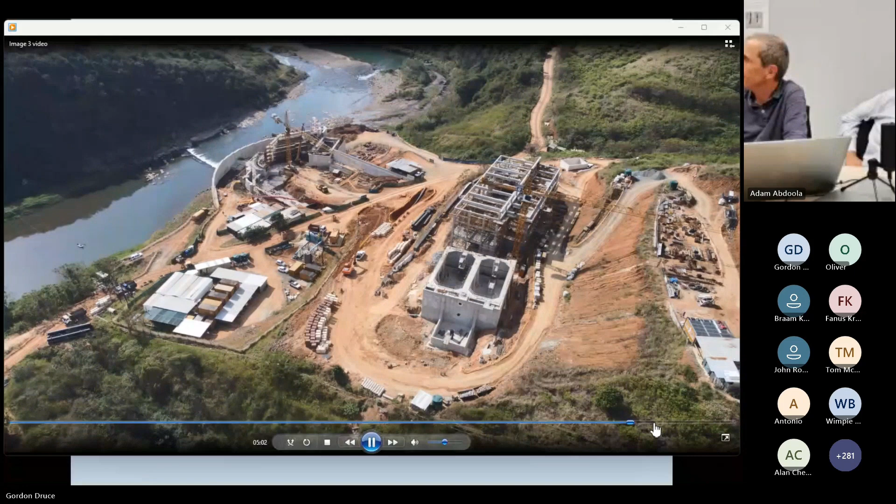We keep on harping on about how steep it is, but the access road up to the site will come up around here, all the way around that building, for any heavy vehicles to come in. Just because of grade. You can't go straight. Yeah. So that road's at 15%, which you don't really want to go much steeper than that.

So even the district road is going to be raised by about 3 meters. Yes, the district road from about there to about there is going to be raised, particularly at this end of it, because it needs to come up to that level there. So we have mechanically stabilized gabions around here. We have another section along the bottom there, which we have to raise.

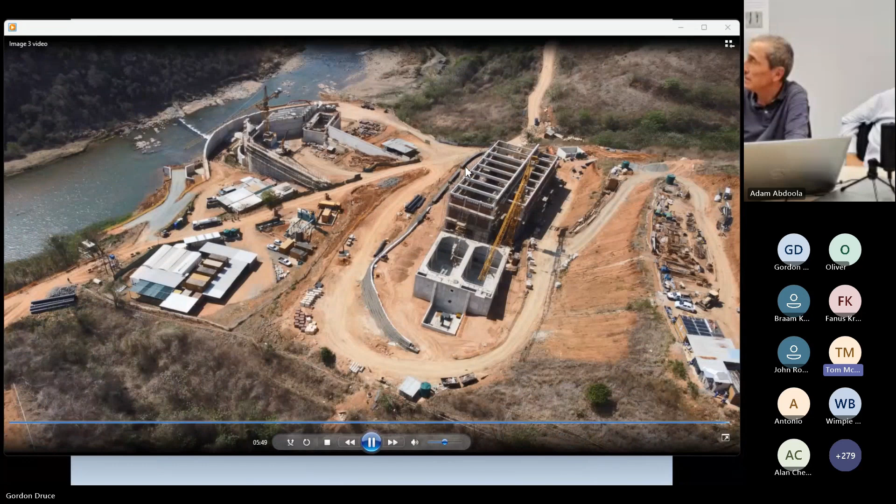And I'll show you on the video clip that we've got, the highest point of that mechanically stabilized wall is about 15 meters high. So if you stand and look up at it like this here, the walls of Jericho, I suppose.

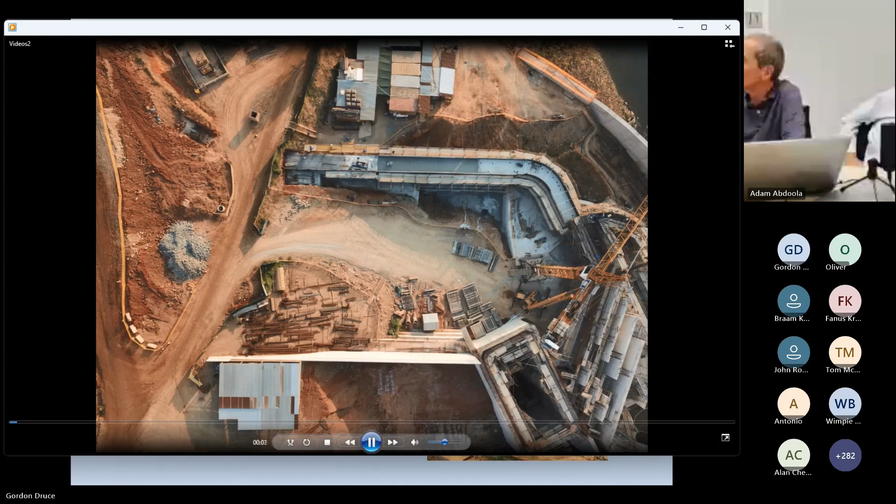That's not where I want to do that. I'm not going to show you all of the video clips. I'm going to go to the one that we did yesterday. This is about 10 minutes long. I think we can just play it through. Then there's the questions. That'll take us through to 6 o'clock.

So that's effectively the state of the site as of now? Yesterday? Well, no, it's not. I've got clips of the ones yesterday. This was taken a couple of weeks ago. The reason I'm saying that is that all the brickwork on this structure is now complete. Now we can see people relative to the structure in terms of size. Yeah.

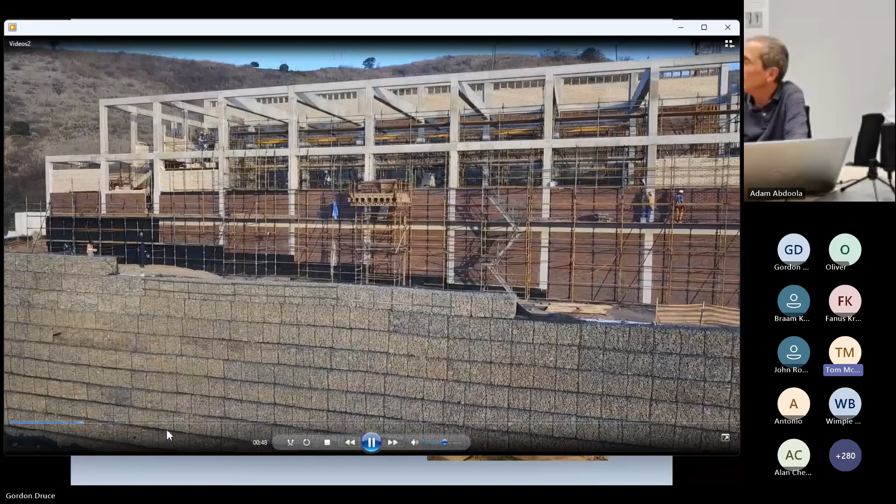Here's your mechanically stabilized gabion. And what you've got on that, each gabion has got a tail mat, a reinforcing mat, and then there's a polypropylene reinforcing mat that goes back 4 or 5 meters. So at every meter you've got that, and it's really anchored into the backfill of that cement stabilized material. So that whole block is actually a gravity structure, not just the gabion. The gabion is really the face of the mass structure.

If you plant ivy or something at the top, it will become the hanging gardens of Babylon. There you go.

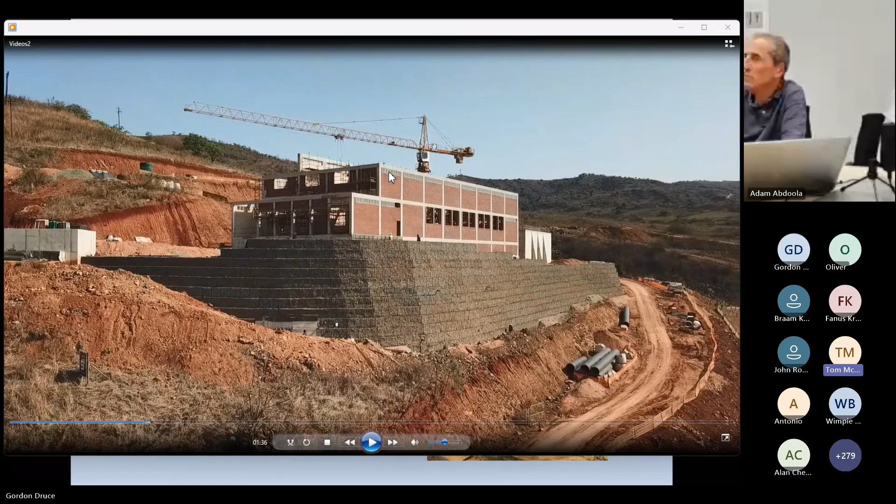Yes, this is yesterday. There you can see the brick infill's done. Brick infill and the wind block panels. No, I don't say wind block. The double pane panels at the top there.

The contractor had a problem getting what we'd specified, so he thought he'd create his own precast block. And we stuck it in with silicone. We thought, well, let's test one to see how it works. And he got 2 sucker things and picked this block up. And the block weighs about 75 kilograms. And the 4mm glass didn't shatter. So we said, well, that's good enough for us.

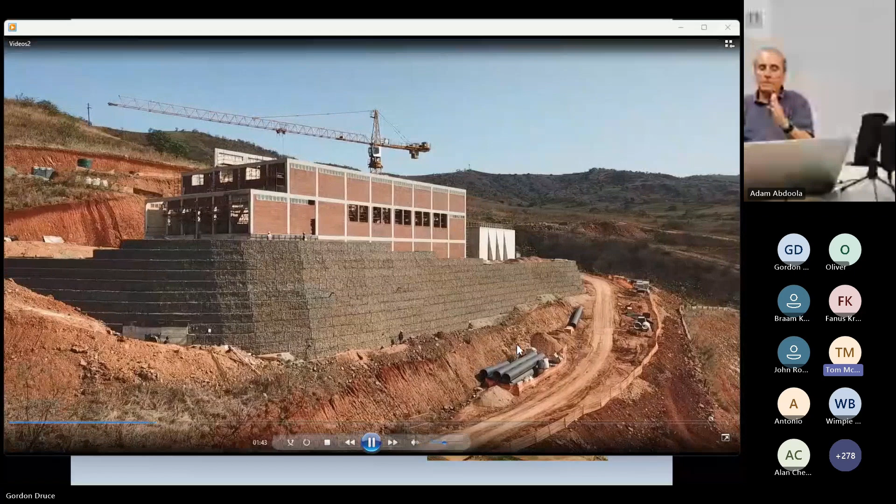So it's precast concrete with a glass pane within it. So you've created your own glass blocks. Yeah. Or they have. Okay. And then these will be vents for louvers to go in. We've got roof sheeting which goes up. And the central columns on the eaves beam at the top, they're about 2.5 meters high. They're not a full story.

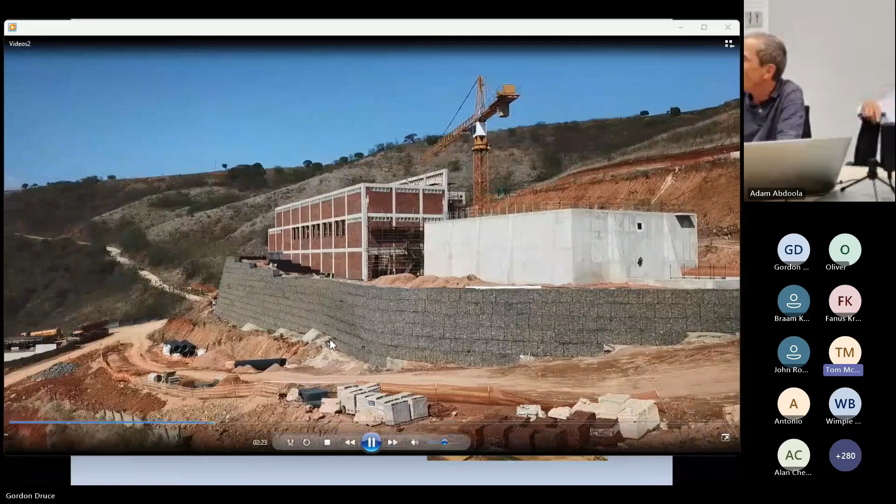The variable speed drives pump out 150 kilowatts of heat at full tilt. So it needs lots of ventilating, and the idea is you pull the air into the VSD cabinets and duct it directly outside rather than into the room, the VSD room. Otherwise you need a hurricane to keep it cool. It just gives you an indication there how steep this is.

The water gets extracted from where you've got fish ladders and all those fancy gadgets Duncan spoke about. Then it's got to get to these things up top. Is that the pipeline you spoke about? You mentioned a 217-meter pipeline as part of this phase of the project. Correct. It goes through that mass gravity structure around where the generator room will be. And then come across the road. Under the district road.

And the rising main, so 1 meter diameter, has been laid from there up through. Is it in the ground already, or will it be built? No, it's in the ground already. Okay. And I'll say it again, access is a problem. So we have to lay that, then backfill that, and then go and create another trench and lay the HDPE pipe. The scour pipe to drain the balancing tank back to the river.

Those are the pipes there. Those are the steel pipes, the HDPE pipes lying down over that. Those are waiting, and those will go in down back to that point over there. And the hydrocyclones in the foreground, that front box by the balancing tank.

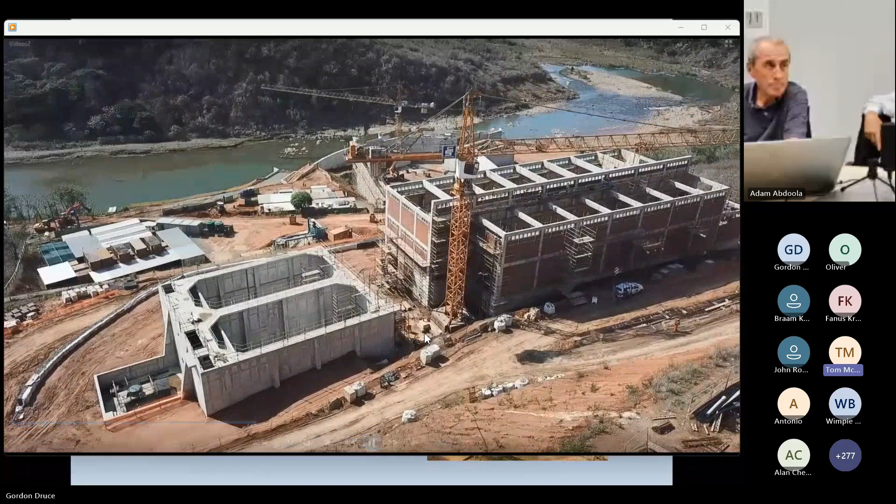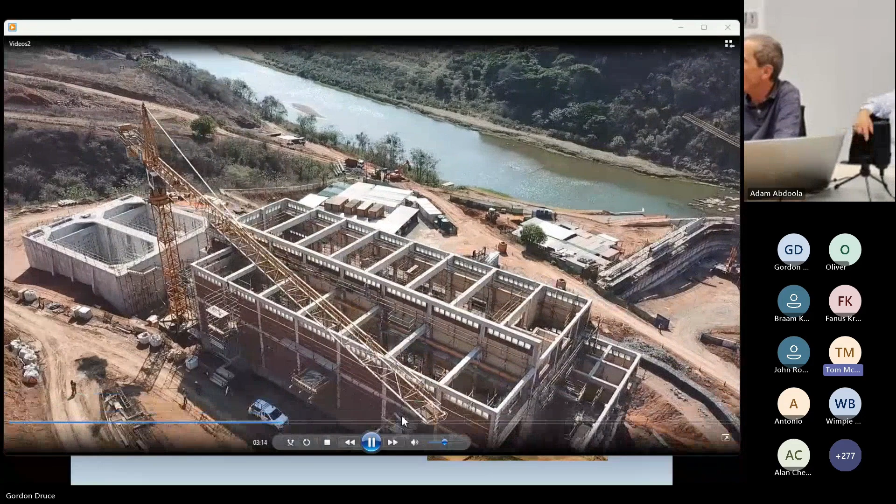And then that capacity, that storage Duncan spoke about for a 24-hour, where is that in the picture? The 24 hours will be right at the end of Quarry Reservoir. But the raw water storage, 12-hour storage, is 1 kilometer up the hill. So you pump up to the raw water reservoirs, which are open-topped reservoirs with scour flushing facilities so you can flush it. And again, we have a 400 diameter HDPE pipe that would come all the way back down the kilometer, back down to the river, or super tube we call it, because it would be supercritical flow.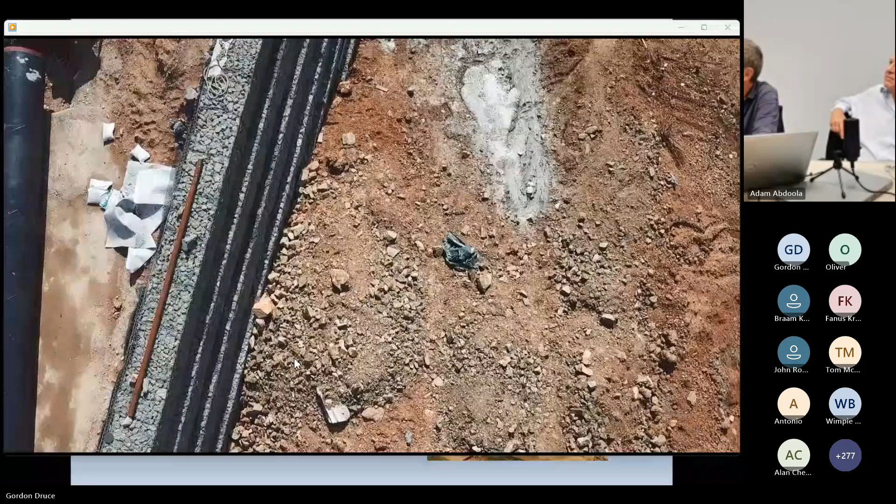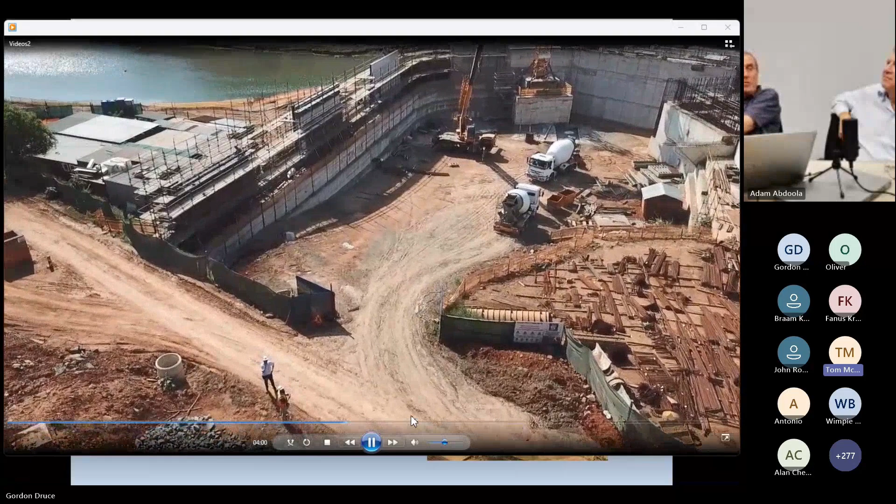You can see the pump plinths inside there. It's the isolation chamber. Just trying to get the perspective on how high that wall actually is. So there's your contractor-made glass bricks, what we could see in the photo. So the brickwork on the outside is dark brickwork. The brickwork on the inside is a pale face brick, obviously to make it lighter.

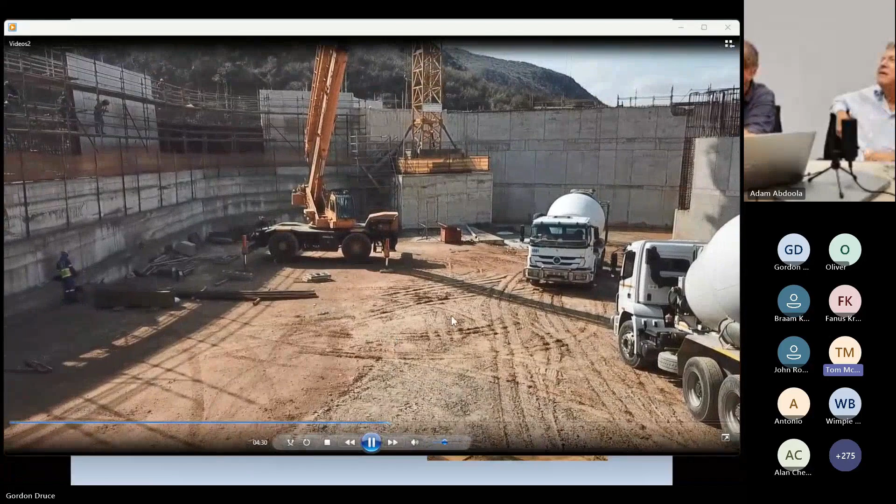Okay, now this whole area here is what needs to be backfilled or stabilized to that level there. So how many cubes of material is that going to take? And where do you get that material from? There's no shortage of sand in the area. There's big sand winning operations nearby. In the riverbed? No, well, downstream there's sand winning operations.

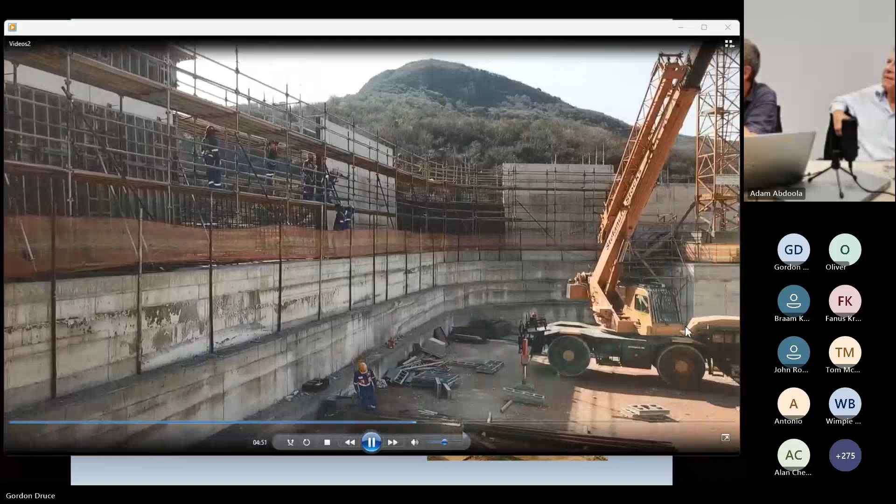But from the river? Yes, some of it will be from the river, some of it from borrow pits, the decomposed. There's also a quarry at the top of the valley. We get material from there too, for the cement stabilized. So decomposed gneiss. All the rock at this level is tillite, and then it's overlain by gneiss.

So this is the height to the top of the parapet wall in these panels. And what will they put, like a guardrail? No, the concrete parapet wall. That is the guardrail level. Oh, okay. So the deck will be slightly lower than that. 1.2 meters down. You don't need anybody hanging and doing a nosedive over the end of that.

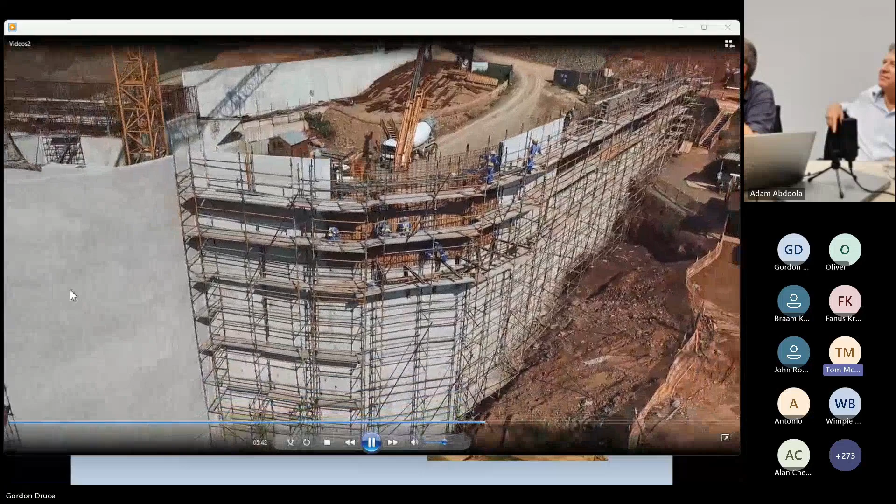We've got harnesses on those guys. Are they connected? I can see the straps. The health and safety on site is strict. We get audited twice a month. All those things are abided by. Okay, while that's running, let me just go and see. There were a few more questions. 600,000 hours LTI free as well, yes, which is quite a feat, especially at this height. Sorry, I forgot to mention that. 605,000 hours with no lost time injuries.

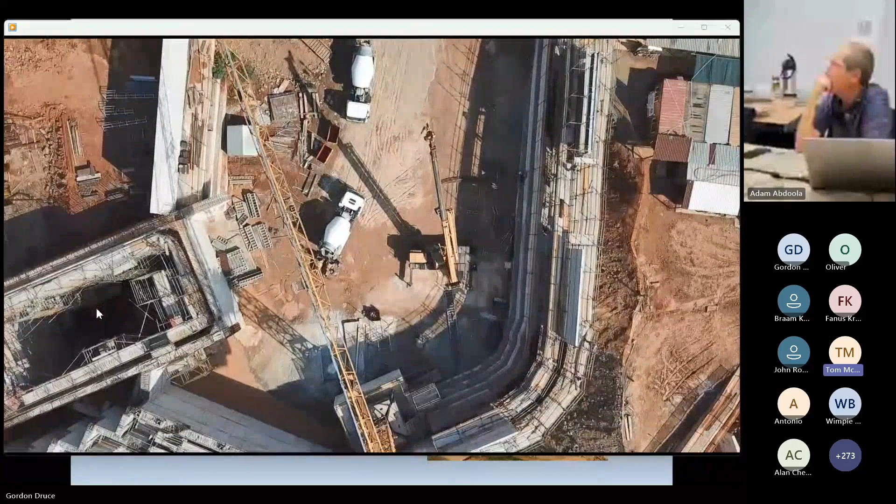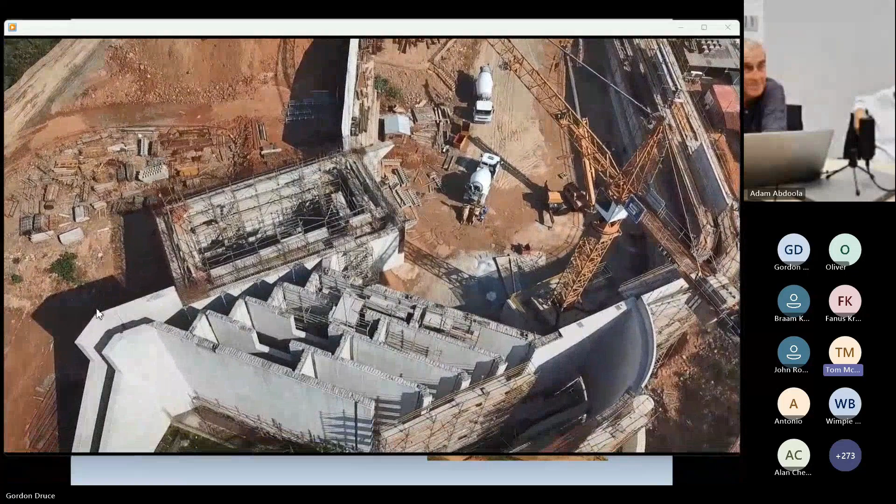Okay, let me find the questions. Okay, this one is from Mr. Umkhomazi. Thank you for the presentation. Sorry, the messages keep popping up. Do you provide vacation work to civil engineering students? If yes, are there available spaces and details? So I'm not sure to whom that question is directed, but I'll allow the contractor to answer.

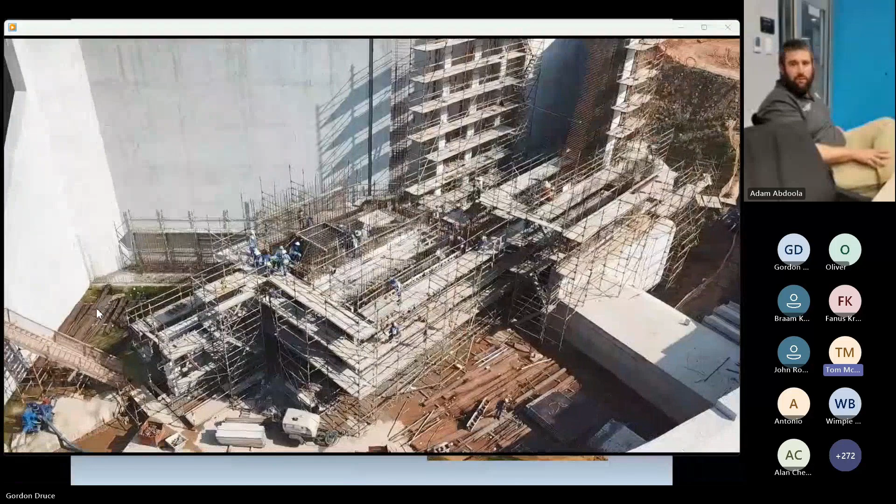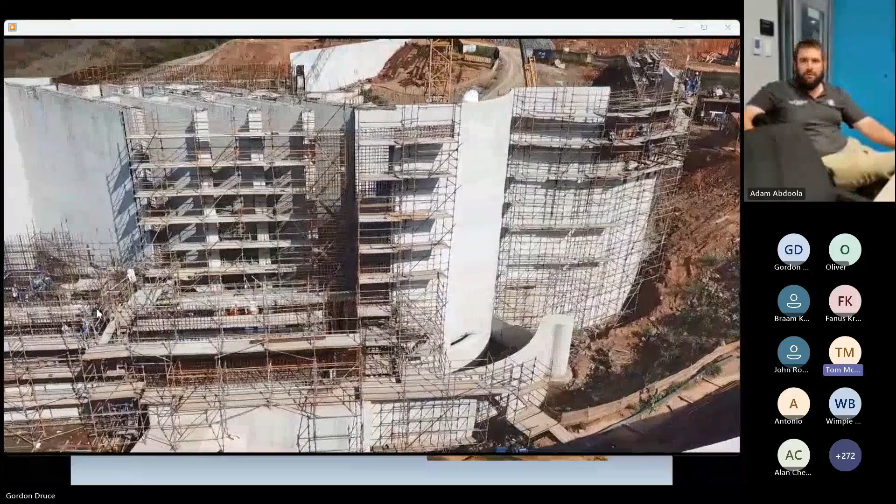Yeah, we do have internal programs with the company, especially as the construction industry is booming at the moment, or we're coming out of our 10-year slump. So if you are interested, get a hold of Stefanutti Stocks head office, and the HR department will happily help. So do they go to the website and look up vacancies? I think they can just pop into our head office in Westville, or find the site and ask for help there. But on our site, we have brought some interns, postgrads through the ranks, and they are graduating to proper site roles.

You've not taken any of the students involved in the hydrological study to put them downstream, so if they fail.

No, we've got a lovely team on site.

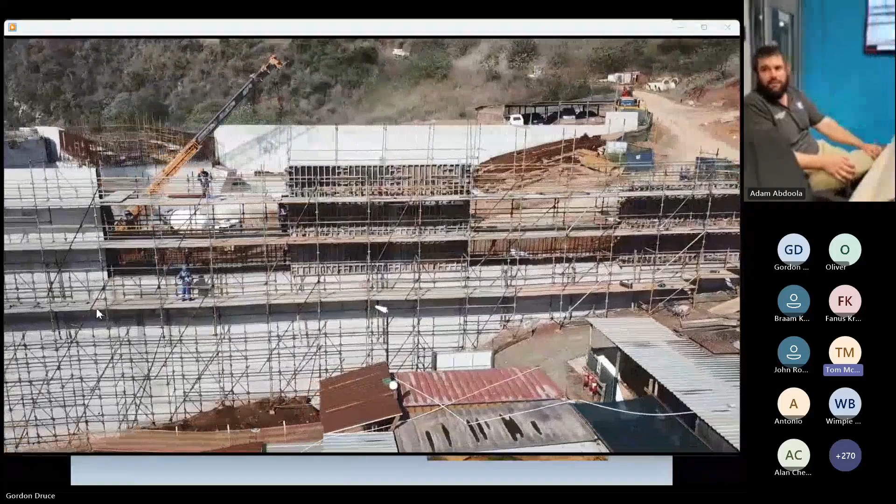We've been grateful. And then an extension from the same delegate: from the presentation, the chemically treated water won't go back to the river. I'm not sure if it will or it won't. What chemicals will be used to clean the water? The polyelectrolytes, coagulants and flocculants. It's a polyacrylamide, usually a whole basket of different chemicals you can use to destabilize the ions in the water, and essentially clay. Most of the content would be colloidal clay, which needs destabilizing so that it settles out.

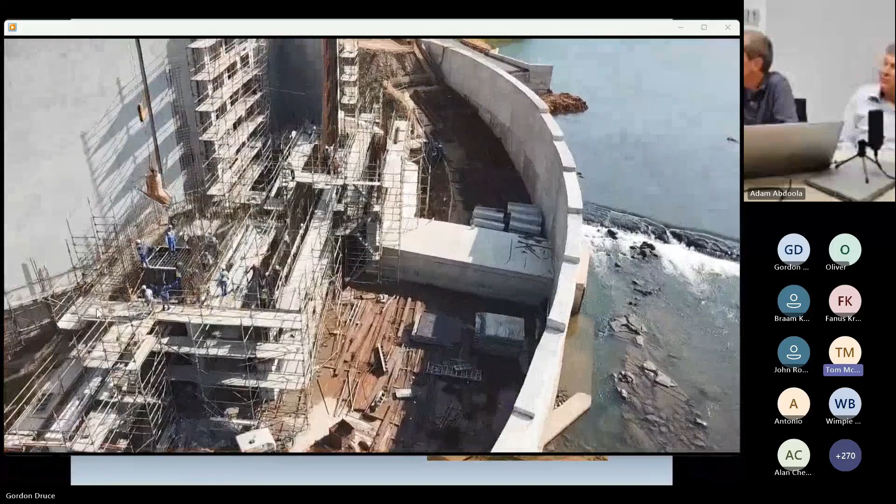You can see how clean the water is there. Yeah. That was taken yesterday. And those precast blocks behind the weir there are the steps in the fish ladder. And vertical slots, like baffles with a slot in it for the fish.

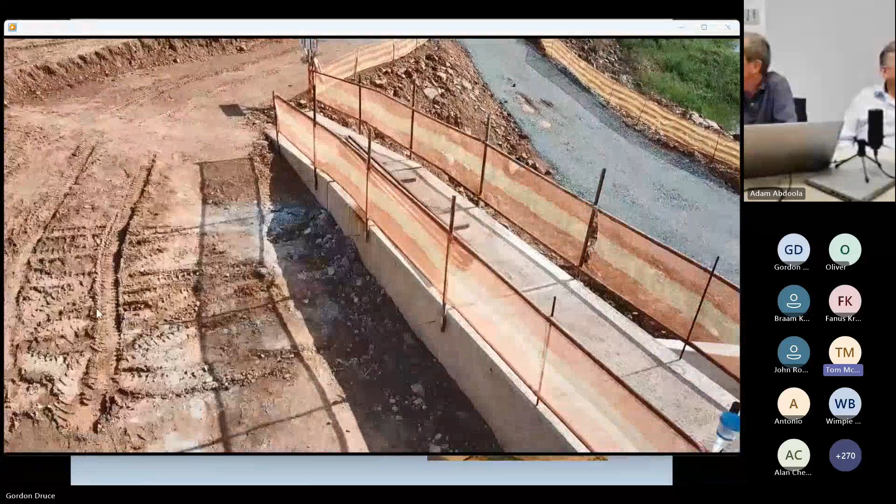Then there's a question from Ian. Has security and vandalism been a challenge on site? Not so much security. The site is quite remote, and there's no passing traffic other than the two people that stay beyond there. So I don't think it has been. So it's going to take a serious effort to go and steal anything from the site. Yeah, you've got guards at the entrance, so I'm sure that after hours, the people coming in there will be questioned as to why they are there.

And it's quite difficult to steal a big block of concrete. So if you're that desperate, you can have it. In fact, you're not going to put a sign on the coffer wall to say, "Please take me," but you don't have to demolish it. Okay, let's see what else we've got here. Lots of comments on beautiful scenery and interesting project.